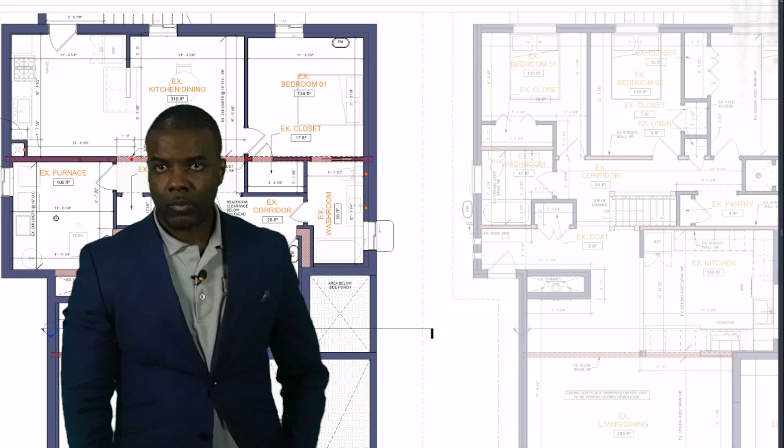Hi everyone, good to see everyone. Hey Ronald, how you doing man? I'm doing good. How are you doing, Nathan? I'm good, all right, good. And how are you, Tanya and King? We're doing good, doing great. Oh, I didn't even see you guys there, how you doing guys? We're good, full team here today. And Gabe just joined, Gabe can you hear us?

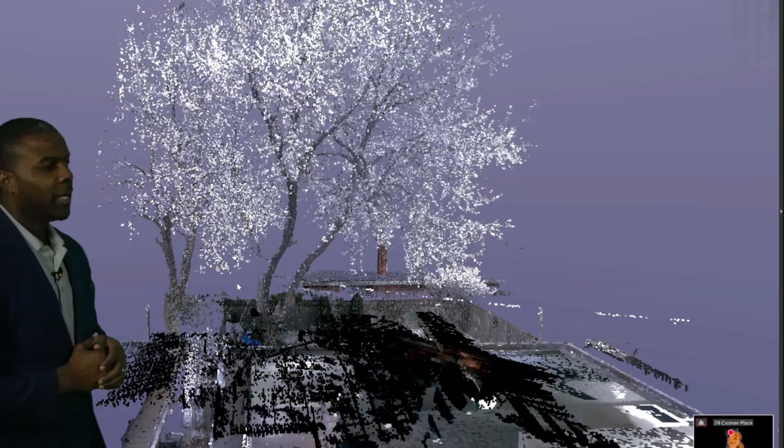So as you can see here, Jose is showing on the screen the data we captured on site. You'll notice we're able to walk through and take measurements on any of the items you can see on the screen here. So if we need to verify anything, we very well can, and we'll be able to discuss it at length if you guys like. I just wanted to show this, we're not going to get too much into it. This is the existing home, everyone on this call already saw this property and we know what's there. Now what we want to look at here is how we take that data and use it to develop what we call a digital twin. A digital twin is just a replica of your property. So could you show the single story existing overlaid with the point cloud for me, Jose?

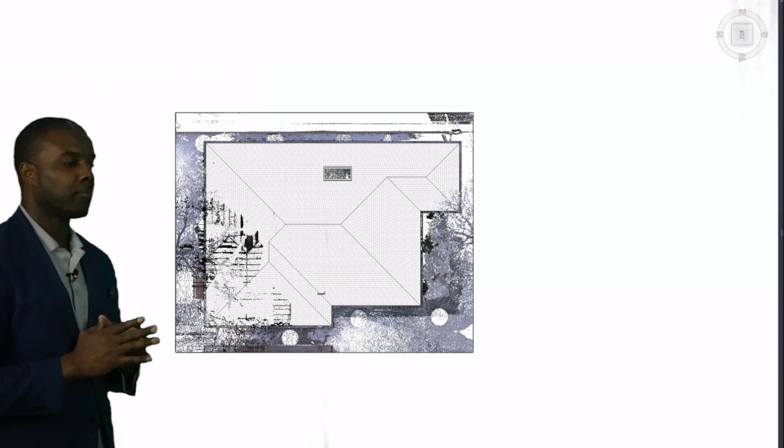We're not guessing the shape, form, measurements, or volume scale of your home. This is very precise, in some areas precise to a 16th of an inch, but overall you're looking at about half an inch accuracy. So it's good for determining whether or not things could be moved. We're able to identify a lot of the structural elements, and even though it doesn't see behind walls, we're able to determine where things are.

I want to preface the call with this. We actually take a lot of time ensuring we're presenting the most accurate drawings. In some cases, we may miss the placement of a window or so forth—that's not a big deal. We'll make sure we verify this before we submit for building permit against what existed, so that's going to appear on the drawings.

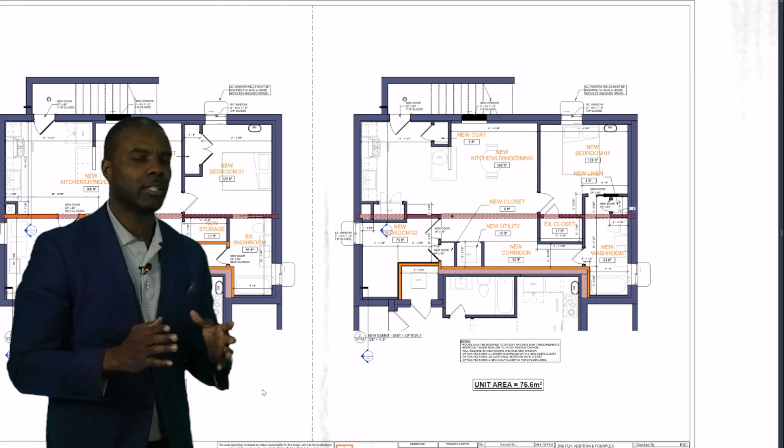Once we complete these, we then present some design options. You'll receive a copy of them. All the design options are basically 2D layouts of the space, but I'll also send the 3D layout, so you have the ability to manipulate it, dissect it, and figure out what was happening or what is happening. Those are the three elements we'll go in and out of, but we're primarily going to focus at this stage on the actual 2D drawings.

We're going to start in the basement because that's where a lot of the important structural aspects of the drawing are. The basement is also going to have a few modifications—one being that we're adding a second unit, and the other being we have to add an entry into that unit. So we do have some options for that.

But first, let's talk about the rear unit. So Jose, you were right, let's go back to the rear unit in the back. Before we get into the details, do you guys have any questions right now? No, I'm okay. All right, yeah, okay wonderful, okay so you guys are aware of this.

Right up here, that's the entry into this rear unit. As you walk to the back of the property, there's an existing walkout, that's the entry into the basement. Into this basement, you have this whole space, and that space is actually the open concept kitchen, living, dining room. Then right over in this area, this is where you have the existing bedroom.

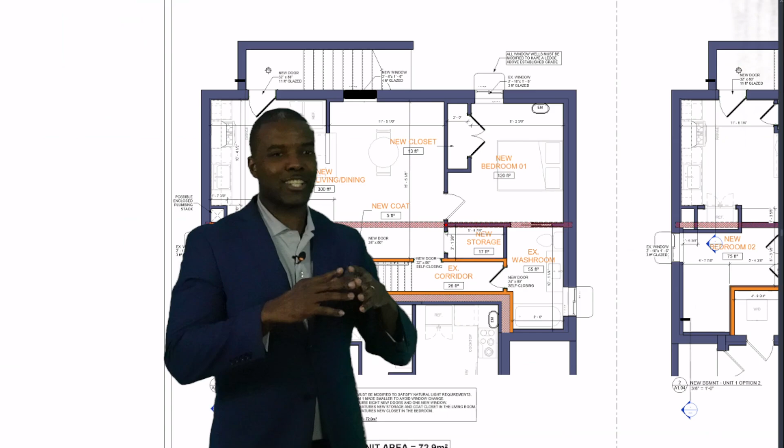You may remember from the site visit, we had to make this room meet the building code requirement for natural light. That would mean either we had to shrink the room or add a larger window. We always try to find the most cost-effective way to make things work. In this case, you'll notice we added this closet. You might say, Ron, we don't want a closet there—you may not want it, but we need it there just so the numbers can work out from a natural light standpoint. That's a building code requirement.

We had to put the closet in there, but the bedroom really hasn't changed, it's still going to remain as a bedroom. Then as you go down slightly lower, we actually did make some modifications here to the washroom in this area. Because what we're essentially doing—you'll notice, could you highlight the fire separated wall, Jose?

So we are going to, I'd prefer if you do it in a solid versus a block, or you can just select them so they're blue. But you'll notice that we have to fire separate the units, right?

You guys must have heard this in some conversation during your research. We have to fire separate the apartments so that they're independent, and in doing so we have to create fire separated walls. In this case, we are keeping the interior stairs that's there right now. But this wall right here is actually the wall that's separating this unit here.

Of course, you do have your furnace, which we're keeping intact, keeping the furnace room as intact. So we're leaving this entire unit as a one-bedroom open concept kitchen, living, dining room, and we're leaving the furnace and the hot water tank, or you just decide to keep that as a utility room. We'll talk a little bit about services as we go through the presentation, but essentially what we're trying to do here is create the most cost effective layout. This is the minimum you can do to make this a legal suite without going overboard. This is literally a bit of drywall and some studs, and basically this thing is ready for rent.

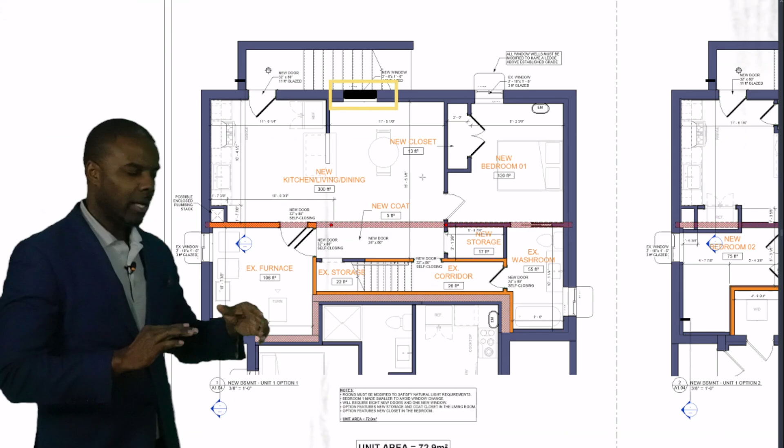Okay, well let's not get too excited, because we can't rent it out since the whole building is under renovation. But this is the minimum amount of work you would need to do to make this a legal suite. You can see we're leaving the interior stairs on this option. And remember, we have a few options - this conversation is to stimulate ideas. Maybe you guys might like option 1, option 2, or a combination of both, which we will develop. So keep in mind that we always present a cost-effective option, and we always present an idealistic option.

So let's take a little look at the idealistic option there, Jose. Same idea here, same layout, so we're not changing the foundation footprint or the footprint of the building. That would lead to a lot of requirements from a zoning standpoint, so we're not affecting that.

But what I want you guys to take note of is now we have actually modified - you can see this wall. Could you give us the all layer, Jose, so we can see the walls that were removed? You'll see all the elements that were removed once Jose pops that up. So you guys can notice - there is the stairs that's being removed, shown in orange right now, and the wall that was previously there is also being removed.

So you guys can see that wall has been removed, and now this unit becomes a slightly larger unit. It's always good when you have a slightly larger unit. You'll also note a big change here is that we're now converting this utility space. This space that was utility or furnace room before is now going to actually be a bedroom. Go ahead and turn off the demolition layer, Jose.

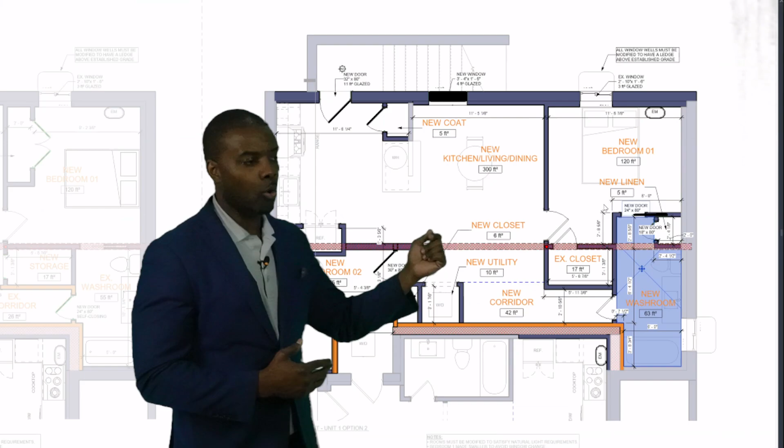So in this case, we're taking after repair value into account, because obviously a 2-bedroom unit is going to reappraise higher than a 1-bedroom unit. So this is something we're taking into account. Obviously you're talking a fair bit more work here - we're removing the interior stairs, demolishing the wall, making modifications to enlarge the room. So we have to add more natural light into the space as well, and then we're adding a bedroom. This means we're actually removing all of the furnace equipment and stuff like that.

Once you remove the furnace, it simply means we're now providing each unit with its own heating and cooling source, through the installation of heat pumps and blowers, whether ducted or ductless. Nathan will give you ample information on the different options available. For now, that's one option we're exploring once we turn this furnace room into a bedroom. I'll leave a window here for any questions, since we have 4 more spaces to talk about.

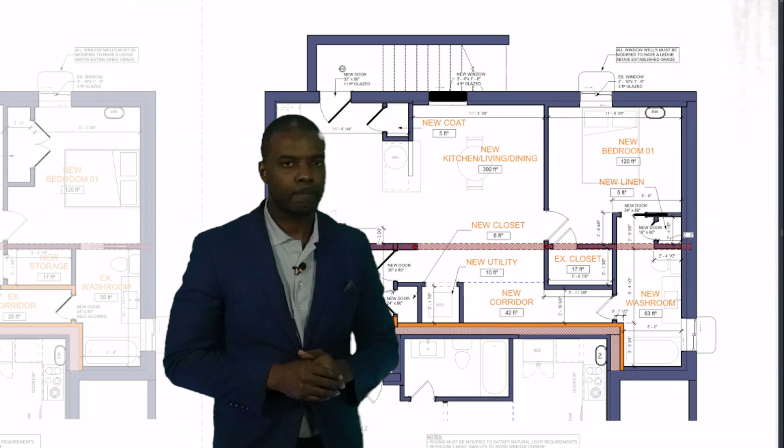Quick question: you said 2-bedroom. Is it 2-bedroom on one side of the unit? Because I'm looking at a furnace room that's turning into a bedroom. Yes, so the furnace room is going to turn into a bedroom, so that's 2-bedroom on one side of the basement.

What about the other side? No, there's 1 bedroom on one side and another on the other side. So the 2 blue boxes you're looking at - the existing bedroom remains where it is, and we're just taking out the furnace and converting that space into an actual bedroom.

Of course, so there's a divider, because when you said a washroom can be used by the same bedroom - the 2 bedroom, yes, that's a really good question. So what we're doing here - Jose, could you highlight this door here? This is the door that is currently... did we change the door? Anyway, this is the door that's going to give access from the existing bedroom into the washroom.

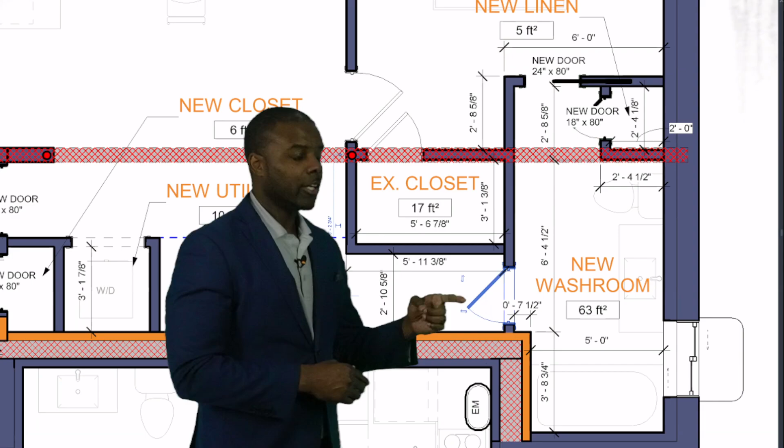And this door is going to give access from outside of that bedroom, because it's kind of odd that you'd walk through someone's bedroom to get into the washroom, like if it's two siblings or two friends. So we created a separate entrance. The only way we're able to accomplish that is we had to demolish the wall and remove the stairs and move the fire separation, which is now down here. So this is now the fire separation.

Does that make sense? I mean, none of this is supposed to make sense by the way, so that's why we're here to answer questions. So what we're looking at right now is just one of the 2 basement units - we're only looking at the first basement unit at the rear of the property. We're showing you guys two options you can explore: one being a 1 bedroom and the other being a 2 bedroom option. You have the ability to explore any of those options, and we can make it work for you from a building code standpoint.

Now obviously there's a budgetary standpoint, but Nathan will speak to that once he has the files and is able to assess that and do a quantity survey.

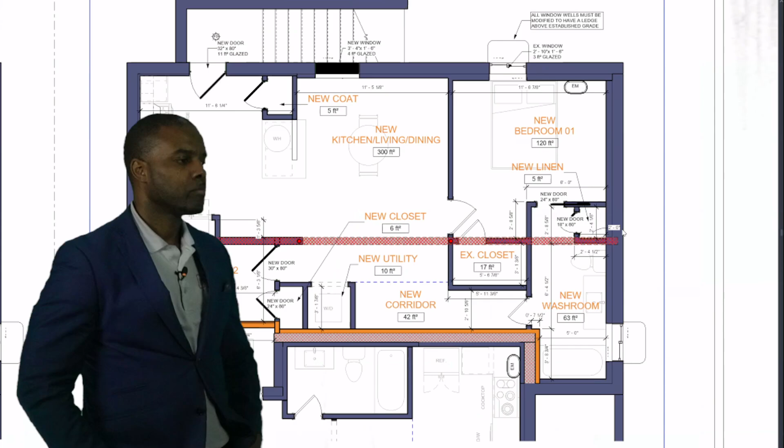Can I ask another quick question? No quick questions, only slow questions, okay? With this second option - is natural light not an issue for the master bedroom or bedroom 1, where you'd need to move or create the closet or expand the window size?

Yeah, so that's good - you guys actually have a window inside of this, if you want to say primary bedroom. There's a window that's here right now, that's this window. And you also have a window that's right here. In fact, let me come on this side here. So this is a window as well, right here.

So you have a window inside the furnace room. That window is going to serve that second bedroom that we're creating, so we don't have to cut any windows out. That's the only reason why we would propose something like this, because we think there are some economies of scale you could utilize, and some existing requirements already met with existing windows and so forth. So this option does give you 2 bedrooms, and I'll step out of the way if you're looking at the wrong screen.

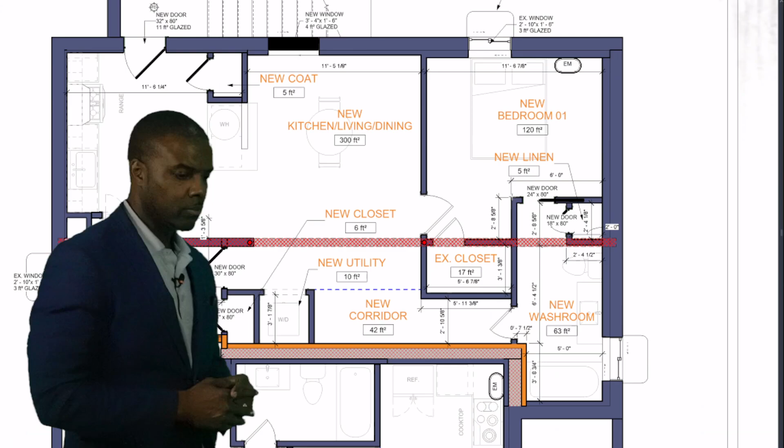This option gives you the ability to add 2 bedrooms into that space. So I'll just add here, the new bedroom is made a little bit smaller by extending the new washroom to add that linen closet to meet the natural light requirement. This part's new.

So that natural light requirement isn't per room, it's just the overall square footage of living space that has to have a certain amount of natural light. Is that how it works? That's a very smart question.

So to answer that question, every room, as per the Ontario Building Code, has to meet a very specific percentage of glazed area based on the square footage of the room. A bedroom needs to reflect 2.5% glazed area to the actual footprint or floor area of the room. So for example, if the bedroom was 100 square feet, the glazed area of the window needs to represent 2.5%, which would be 2.5 square feet. Is my math correct there, Jose?

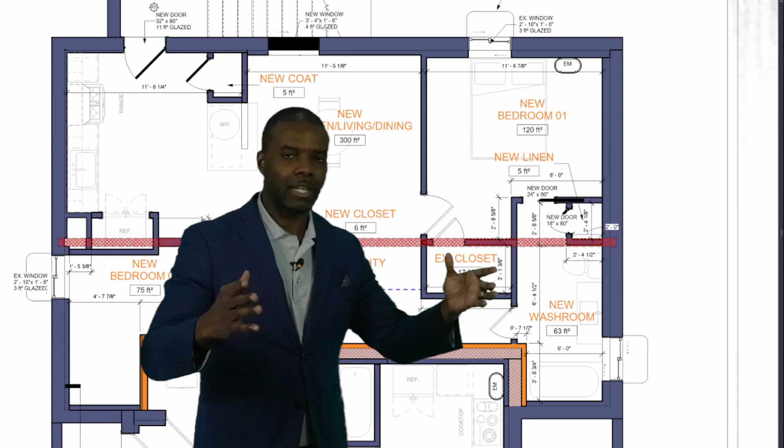Yep. And the same for the kitchen, living, dining room area, but more specifically the living dining room area needs to reflect 5%. So in the case of a 100 square foot open concept living dining room kitchen area, the glazed area accumulatively needs to be at least 5 square feet. While those numbers aren't shown here, to avoid cluttering this first iteration of the drawing, we've taken all those numbers into account and we'll submit them to the building department when we actually send it for review.

Is that helpful? I have a question. My question, Ronald, is in this second version, is the electrical and everything separate from the rest of the house? I'm assuming the first one isn't separate.

That's a good question. In fact, this property is going to have really two overall components: a multi-generational component and an income generating component.

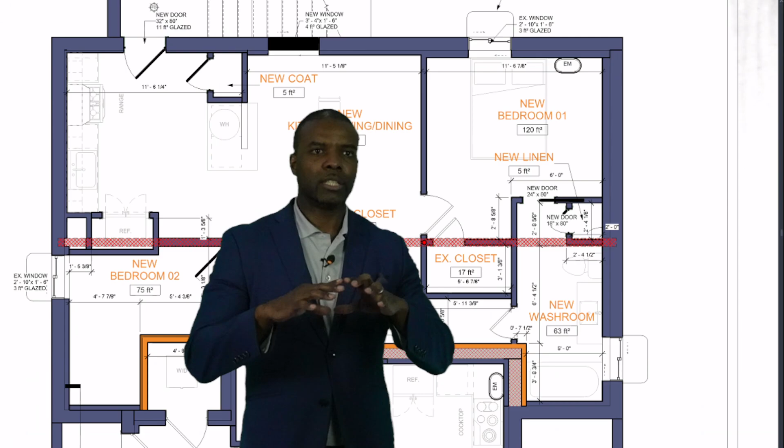And for the income generating component, I am going to be advising the Darkos that they should separate those elements completely, because it's very difficult when you lump, for example, the electrical bill into your lease, where you say you're going to pay 30% or 20% of the water bill and the gas bill. That becomes very complicated. So I'll advise them to separate the water and electricity so every rental suite has its own bills and is responsible for paying them, so they don't have weird interactions with future tenants saying 'you got to pay your 40% this month.' That's an odd conversation to have. They don't have to, but that's the best way to streamline operation of the asset once it's done.

Now as far as the other generational component of the property, they could decide to just do one bill, and this is where you come in - you might say, if we split it into 2 meters versus 4 meters, or 3 versus 4 meters, you can save a certain amount of dollars. I'm not going to get into the weeds of it, but the generational component, which will be the main floor unit and the second floor unit, could be on one meter, or they can split that so everyone is responsible for their own usage.

But I think what's more important is that in the future, if the Darkos decide at some point, 'we're moving on up and we want to move into some other home,' then all the utilities are already separated.

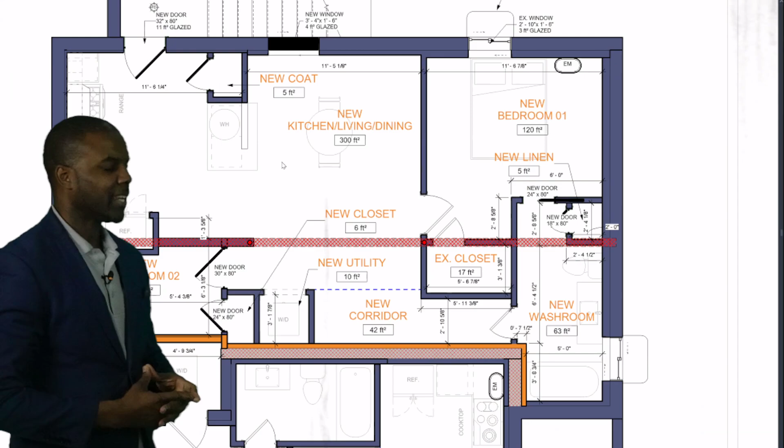Yeah, that's right. So within the basement units in particular, because this is a small unit, and any unit, I would not suggest this for your larger unit upstairs. But for every unit, these 2 smaller units downstairs, you can easily use a 21-gallon hot water tank. It's about 24 inches tall or so. And that can go into a base cabinet or somewhere really inconspicuous.

And that can really give the unit, and I would stress that I would suggest the hot water tanks be electric, right? Just simply because once it's electric, you can put it onto that unit's specific electrical bill. They will pay for their hot water usage, which indirectly makes them think about how much hot water they're using when showering. So it inadvertently reduces the amount of water they use because they're not going to be running hot showers for 3 hours, right?

So this is kind of a smart way to do it. Again, it's really up to you guys based on installation costs and of course the actual product itself. But we have had many clients that have done this. Okay, any other questions on this here?

We have a lot of material still to cover here. You guys can certainly always come back to it. I'm sure more questions are going to come that are very similar in nature as we look at the next unit. Okay, so great, this is awesome.

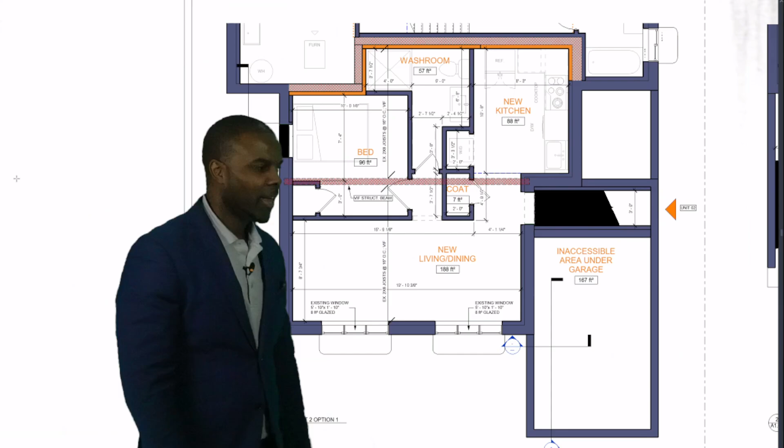Okay, awesome. So we actually did something nice here, I think is really nice. And what we tried to do, could you just show both options side by side so we can take a look at them both? Yeah, so both options in the front unit, we attempted to make both of these bedrooms, right?

So there are two bedroom options because we believe, is it two bedrooms or no? There's one 2-bedroom and then there's one 1-bedroom. So let's look at the 1-bedroom option first because again, this is the cost-effective option. We're always going to look at the cost effectiveness of a project before we look at doing something idealistic.

And we only do an idealistic option if we think it's going to have a higher after repair value. Because after you guys have finished this property, we would like you guys to have the ability to pull out or refinance and get much of the money that you put into the property, right? So while this is going to be a family home, we want to make sure it's treated like an investment, so you guys can actually get the benefits of the investment component of it. So we'll just take a quick look at the 1-bedroom.

So right here, real quickly, you guys might notice that there is a stair here. Now I do want to, Jose, could you pull up the 3D of that, or pull up the separate sheet that we created?

I want to talk a little bit about this, because I know visually this is going to be quite...

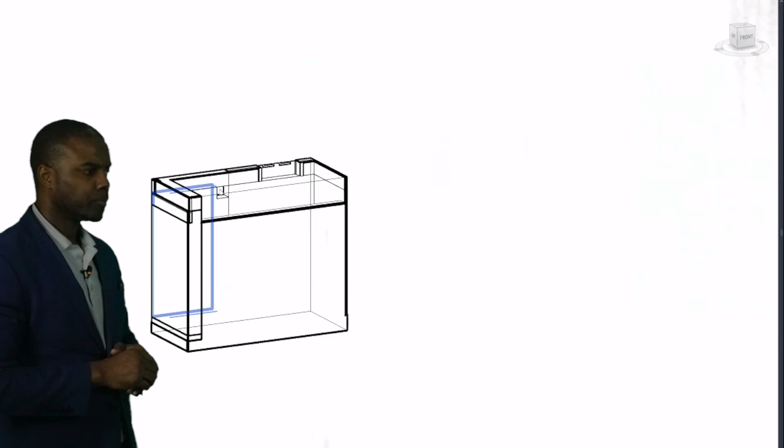Just give Jose a second here. He's just going to pull up the stair configuration within the space. Didn't we already create this, Jose? Why are we recreating this again? It's another file, hold on. Yeah, okay, all right, never mind. Let's continue on.

Let's give Jose a second, he's excellent at what he does. Sometimes the files are just hidden away. Could you pull open the PDF that we have on this? Let me open the other one. I think you already have it saved inside of the sheets, because I was looking at it.

Sorry, I just want to really point out how the stairs is going to be configured, because it's a little bit challenging to understand what we're trying to accomplish. Thank you very much, Jose. Okay, so you guys can visualize this.

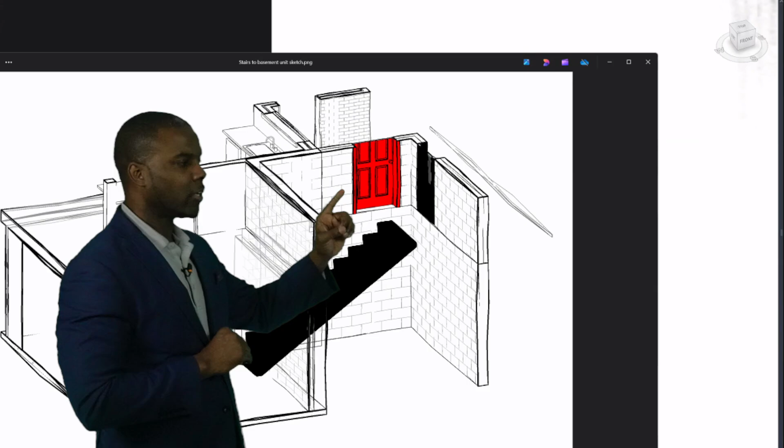So we're given a 3D option here. We want you guys to see that we're inside of the garage here, right? So the stairs is actually inside the garage. What we're actually proposing, you see the red door? The red door is where the door currently is into the garage. We're going to remove that door. I mean, you can keep it, but actually you can't, because someone will fall to their death probably. So you have to remove that door.

And what we're doing, we're popping a new door in where that black door is, off to the side of the property. And the stairs is going to go right up to that door. So someone comes, opens that door, and then they walk down the stairs, down into the basement, right? And we already sort of assessed that the headroom clearance is going to be adequate for what we're proposing here.

So this is one of the options. We thought we would explore this simply because while our exterior outdoor installation is always great, what we think is, one, you don't need that garage -- you can convert it into completely livable space. Secondly, this is excavation work that can happen at any point throughout the year, because that soil -- I don't want to say it's not frozen, but it's definitely not frozen like exterior stairs or soil would be. So this work, and we think this interior stairs, is also going to be better controlled in terms of temperature and so forth.

So we wanted to provide this as an option to what we think is cost efficient to get it done. Now, with that said, I'm just going to move on here.

Right up here, this is going to be your kitchen. So you come down the stairs, you walk in, you got your kitchen up top, right? You got your open concept kitchen, living, dining room area. And then, of course, you got your washroom right up top here -- that's going to be your washroom area. And then you got your bedroom. So this is going to be a one-bedroom unit.

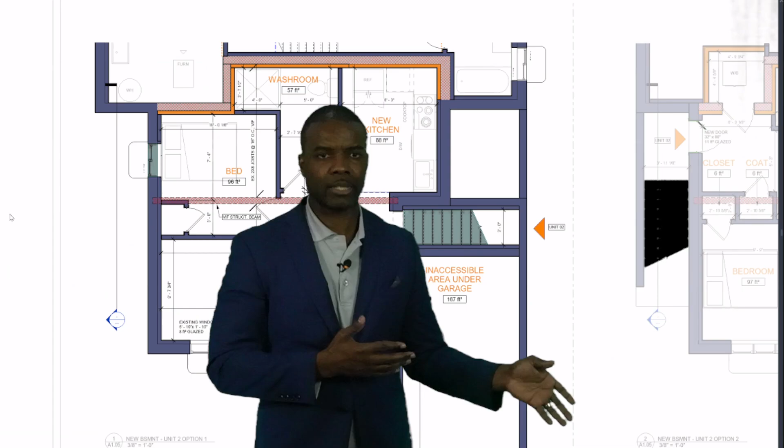Personally, I will not be washing my clothes in a washing machine that someone just washed their shoes or their mats in. It's a hygiene matter, and I think it's very valuable that you guys consider putting independent laundry amenities. This can just be condo sized since these units are small.

So why don't we swap on over? Do you have any questions right now that we can potentially answer on that, or do you want us to move on and look at that after? Okay, we'll move on.

I'll walk here so you guys can see the orange wall up to the top. That orange wall is the fire separation between the unit on the adjacent side, the unit at the back of the property. We have to fire separate that entire unit. Every fire compartment, every dwelling unit needs to be fire separated from each other, in this case by 45-minute fire separation. We'll make sure that wall is assembled to meet that burn time and ensure it meets building code requirements.

Jose, just to help with the visual here, could you swap this? I want them to visually see the walkouts and how it integrates with the property. This might be a little challenging, but I want them to see that the stairs we're looking at are walking from surface level down, down to the door.

Could you pull the 3D? Just pull the regular 3D model and change the option. Let's give them a quick minute here. I think it's really important that you see what this looks like.

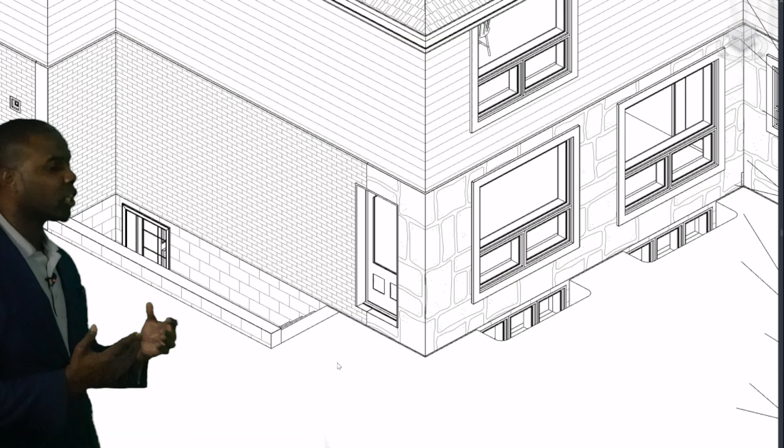This is why I'm saying we have this ideal option, which does require the door to be removed. We have another option that could work and gives more ability to do more with the interior space, but it limits the after-repair value. In this case, we're moving the door, the entry door into the main level, and then we have a walkout going into the basement.

Of course, there will be guardrails. Could you give us a view of how that stairs is going down there, whether you make it transparent or not? I want you guys to see, or move the site, the topography. Okay, so you can see how the stairs are.

So the stairs actually goes down into the basement. Now you can have a better look at this. You can see the stairs going down, the risers going down, down, down, down, down, and then it goes directly into the door. That's where the second access to the basement that we're proposing can go.

Why would we do something like that? One, it would comply with zoning bylaws. Two, it now allows us to utilize more of the space in a manner that we can actually put 2 bedrooms. So let's take a look at the floor plan.

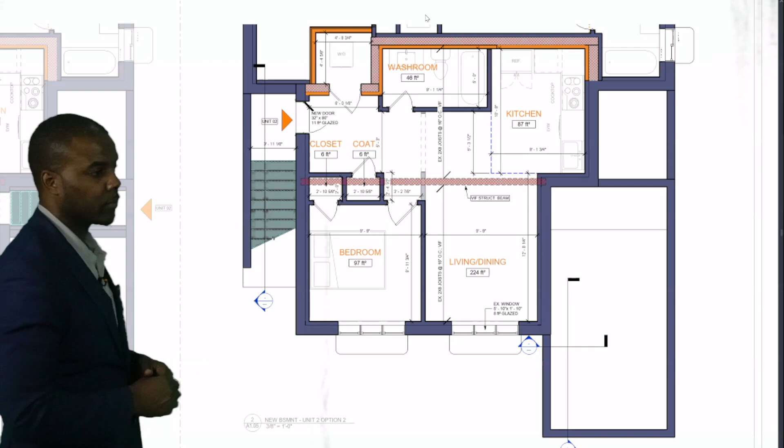Going back here, you can see the green steps going down. It goes down and pops into the unit. This is going to be the entry into the unit where the orange arrow is, that's the entry into the unit. Right above, I think, what's that there, Jose?

That's the laundry room. So the laundry, and then as you come to the laundry, you also have your washroom here, and then you have your open concept kitchen, living, dining room area. Then we have the kitchen, dining room here, and we have the bedroom here. I thought we discussed 2 bedrooms, but this is 1 bedroom.

I only have 1 bedroom here. Pardon me, we actually put 2 1-bedroom options. I thought we were exploring a smaller den-like bedroom, which we could very well put here, but with that said, there's 1 bedroom here, so I take those words back. I know I've been recorded, but I take those words back.

We have 2 1-bedroom options: one with the stairs on the exterior, the other option with the stairs on the interior, which is through the garage. In this case, you just have slightly more utility of space for the open concept kitchen, living, dining room.

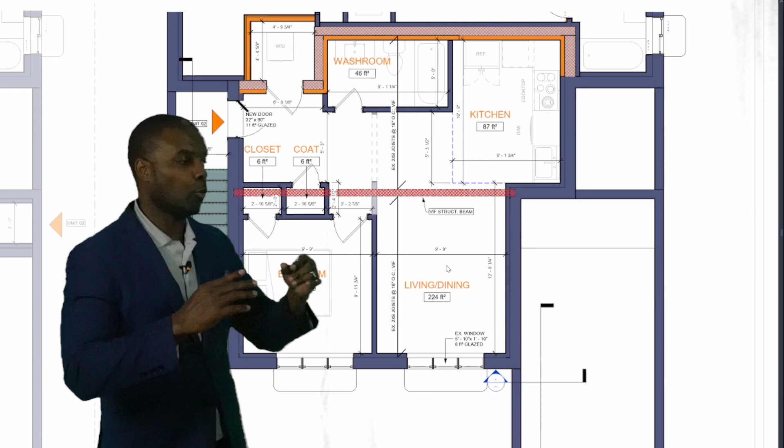So any questions that you guys had on this option, or you guys can also go back to the other option and we can also talk about that as well. Yeah, I have a question about the first option. So with the location of the door into the garage being moved...

One of the things we highlighted on the questionnaire is that it would be ideal to have direct access from the house into the garage. So it doesn't seem like either of these options would provide that opportunity. Is that right? No, we haven't gotten to the main floor yet, but we did provide access from the main floor level into the garage space.

So we'll definitely get to that, that's a good question, but we haven't gotten to the main floors yet. Okay, sorry to rush. And then for the second option that you presented with the new stairs on the side of the house, maybe this will come up when you discuss the main floor. But basically when you're moving the location of the front door, that's going to change the configuration of the main floor as well, right?

Absolutely. Well, not really, we did do some reconfigurations. Again, what I want to give you guys here is a lot to think about. I don't want to just bottle you into this is the option that me, the designer, thinks is the best. No, really, you're going to be living here, you're going to be occupying the space, and I really want your input.

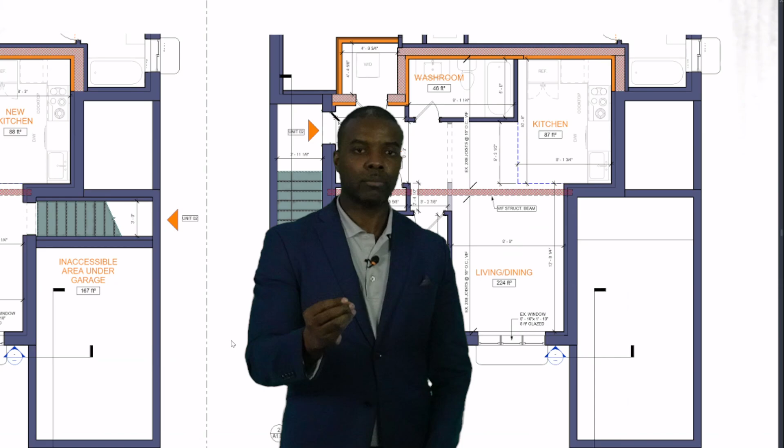I want to give you all the options that are available, and then we can discuss which option I think is best. I'll tell you which option I think is optimal given the ultimate end goal, but I want you guys to know what was my thought pattern and why I'm suggesting what I'm suggesting. Truly, I know you guys are able to make this decision. This is not some high design here, this is functionality, flow, and of course finances. This is a financial decision you guys are making, in spite of all this design stuff we're talking about.

So with that said, the whole idea here is that we give you guys as much to think about. I will be showing you what we did on the upper level, and then we can come back and show you how it actually integrates with each of these basement options. Okay, that makes sense. Thanks, Ronald. Okay, no problem.

Ronald, I have a quick question for you. Yeah, please. In option number one, if you were to go through with the stairs in the garage, would the garage still be usable, or would we have to convert the garage at that point to something else? Yeah, that's a great question. It's going to be converted into something else. It's no longer going to be a regulated parking spot from a size standpoint, but that's not required when you're converting a single family home into a multiplex.

So no parking is required, right? So we'll be fine from that standpoint.

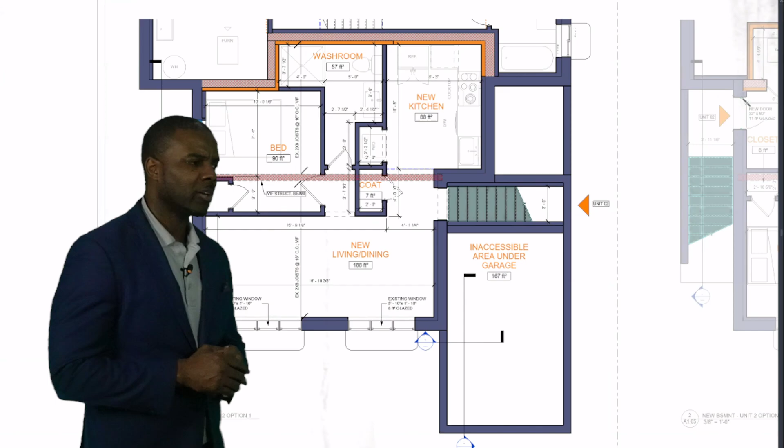Okay, and my last question is, basically the biggest difference between both options is really just the staircase location. Because mostly everything else is the same, it's just the staircase. Well, I mean, yeah, you can see there's some configuration differences interior-wise, but they're both one bedrooms. But it's definitely the walkout.

And I guess, from a construction standpoint, I'm sure excavation from the exterior is significantly easier than with a mini excavator or something like that, from the exterior versus the interior in the garage, right? But maybe if this was happening in the height of winter, you might say the interior option might be the best option, right? Because this is not going to be frozen rock solid, right? So, yeah.

Okay, thank you. No problem.

Awesome, okay good. So we'll continue going on here. Again, still a lot of material, but I do want to say all of these floor plans, none of it stands alone. They're all integrated somehow into another option, and we can always go back and forth between options. So now we're going to just look at what we proposed here on the main floor.

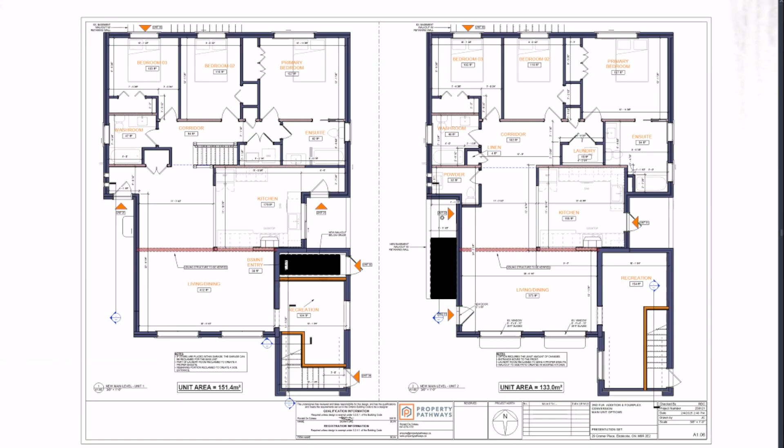So I know this is where the parents, auntie, are going to be occupying, and we also want to keep in mind that this main level is actually in really good condition. It's a shame that it's going to have to be dismantled to some degree. And Nathan, you're going to have a special time figuring out how that's going to happen, right? But we have to do some type of dismantling here.

But what I want to say is it doesn't have to be all of it. In fact, what we're suggesting is that we try to maintain the rear or back area as much as possible, as well as the kitchen area. So the kitchen area, we try our best to limit any modifications to it. But again, to accomplish the goal and meet some of the items on the questionnaire you sent back, we have to make some modifications. We try to limit those.

But I do want to say, if I haven't said it before, the renovation will completely impact all aspects of this property. We are removing the roof. We are installing new, maybe TJIs, new joist system probably. It's going to be nearly impossible for someone to walk on stilts to install these beams or joists overhead, right? So there's going to be a lot of things that are going to be damaged.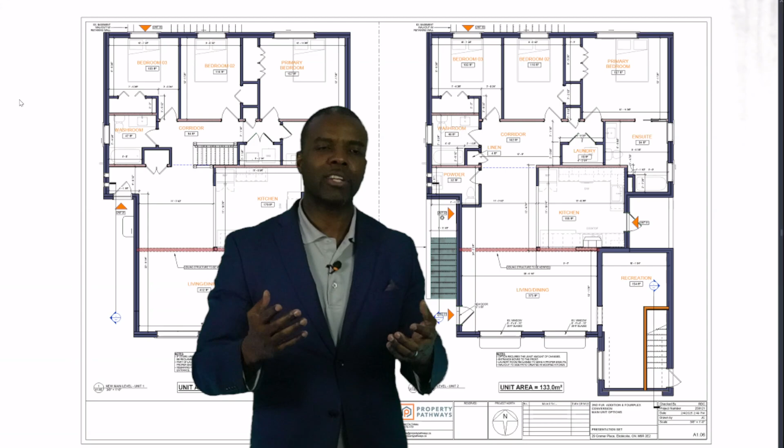Please make sure that it is considered. I would have mentioned this to you guys before, but just please note, this home is very old, and it's going to be very difficult to try to salvage a whole lot of stuff. Now you can dismantle it, remove it, set it aside in storage, and put it back. But most likely there's a lot of things that will have to be removed so the tradesmen can actually do their job properly. Just want to make sure you guys have some understanding of that.

But with that said, we are drawing on paper here, so we like to think everything is perfect, but things aren't as perfect as they appear on drawings, right? It's very messy on site. But I do want to point out that we're trying our best here to maintain all of the rooms above. Could you guys see the rooms above? You want to highlight those for us, Jose?

1, 2, 3. So we're trying our best to maintain the 3 bedrooms that are currently existing in their current format. I mean, look, we could tear this house up and start shuffling around bedrooms and stuff, but that's a waste of time, a waste of money, and it really shows our lack of understanding for what you guys are trying to accomplish.

Unless you guys say to us, look, you know what, we don't want this. But I know, after speaking with you on site, Tanya and King, we know that was not the goal. In fact, you guys were saying, please, can we keep everything the way it is, right? We're going to try our best to do that. On this cost-effective option, I want you guys to notice that we're keeping the entryway right where it is.

Two, we're keeping the bathroom where it is and in its current size. Three, we're keeping all the bedrooms, as we just mentioned, in its place.

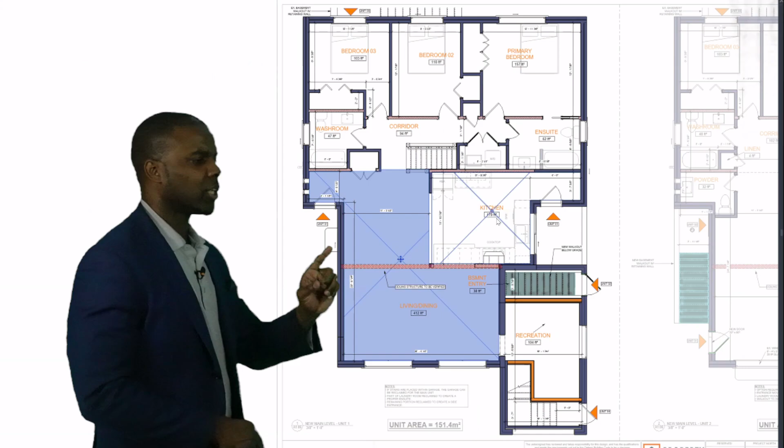Could you turn on the demolition layer? I did want to say, and I mentioned this on site, we are planning, and I would suggest we do, remove that gas-fired fireplace from there, that chimney. I would just remove the chimney, right? For one, you don't want to have a gas-fired place in there or wood-fired place. And if you left that space there, as is shown right now, if you just left it there, it's just an extra bulky, chunky thing inside of the space. It will cost to remove it. So I want to be mindful of that. But it is something that I'm suggesting you remove it. It will really create this really nice open space.

And then, of course, right down here, to answer the question, I think was Tanya, I think you asked the question, like, are we actually having access into the garage? As you can see here, on this option, we actually did create access into the garage. And there is some additional storage or whatever space you want it to be. That can be a little office, somewhere that, you can do a lot of things with that space. That can even be a guest room, right? For whatever the reason might be, so this is something that could be done.

The way that Toronto is going right now, you'll likely be able to do six units in a matter of months. So maybe this can become somebody's studio right in there. You just shut this off and this becomes a studio, maybe for a student, and you're providing them with meals and whatever the case is.

I just want to say you guys have an extra space down there that could be utilized. And if you notice, there are some stairs running in front here. You might be wondering what's going on there, Ronald. Well, that stairs actually supports one option. Could you just flip the optionality there? Actually, no, don't worry Jose, we'll discuss it on the next option.

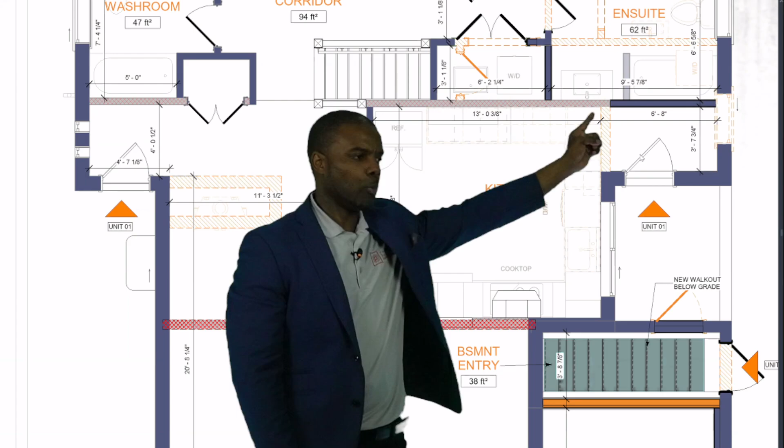I did want to say we are reconfiguring the kitchen. The kitchen is going to, we're going to demolish the wall currently there. And this is going to just open directly into that area that used to be open along the side. So we're removing that so you still have access to entry points into the main level. They'll be right there. So let me see which hand, this hand, this hand, okay there, to access into the main level.

For example, on this side you might say, okay, we're having a barbecue, you can put a barbecue grill right here and do some stuff. And then you also have access to come out here, walk up to the back, and you have a little bit of green space on the outside. So these are things we're thinking about and considering. We could make this a little small ramp there so it's easier to move up and down. Again, we can future-proof this in the event our auntie and mom starts aging there.

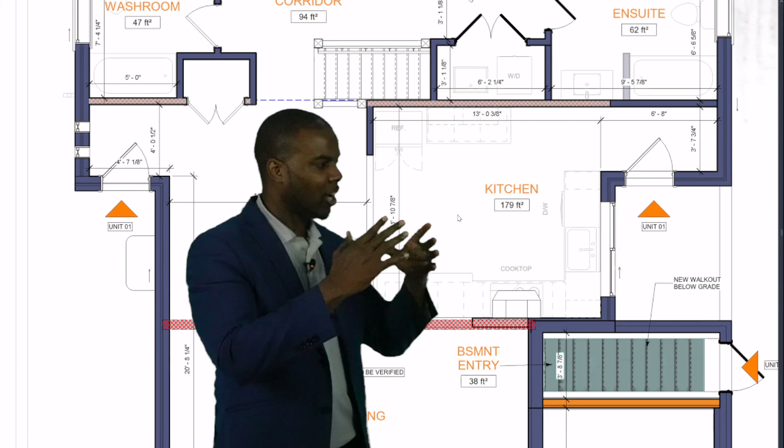So we want to take all these things into account. As I said, the kitchen, you could take it down and put it in storage, then put it back with some modifications and extra things. We know this is not Legos, we're not just plugging and playing. There's a lot of things that happen when it comes to removing kitchens and installing them and so forth. But really, we wanted to provide the optionality there.

If you look here, if you zoom out one more time Jose, you'll notice the stairs into the basement is there, right? That green stairs leads directly into the basement from inside the garage. So that's the option where the front unit has one access into the basement. Any questions on this one? We're going to cover similar type items on the second option, but any questions here in particular?

There's a stairs. You move the stairs from the basement and the stuff in the garage. No, you're okay, unmuted. Did you want to? Yeah.

Sorry, just looking at the staircase, I think all options considered, we should just remove the staircase on the main floor and turn it into maybe a storage area or something. That'll be easier, I think. The mom and auntie have a fridge and deep freezer that we could store in that area, so we can turn that into storage, make it easier.

Maybe when we get to the second option, you show us a version that doesn't have the interior staircase, right, Ronald? Yeah, so we'll talk about that. That's right.

Okay, great. Let's take a look here. Yeah, and I mean, we're getting to all of it, by the way. Again, this one a little less.

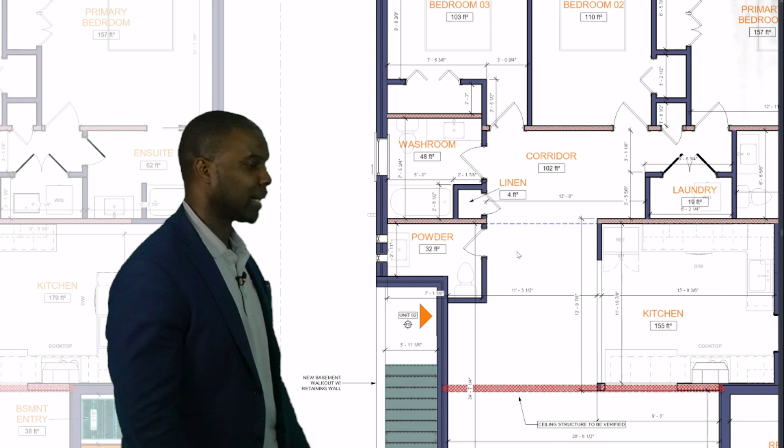And again, what we're talking about here is the mobility, the accessibility component of it. We can make a much larger door, we can put in even a shower that has more convenience. So again, I am future-proofing this. I know, hopefully I'm not coming across as - I think it's professional to plan for these things. So we are just giving you guys the option.

You guys can simply say, nope, that's not going to be the case, and we certainly just leave things as they are. But we do think it's a good idea if you can do that. Because right down here, is this a powder? Yeah, so that's a powder. So when I look at this space, a 3-bedroom home with essentially 3 water closets, and there'll be 2 occupants in this space.

This does not make a ton of design or layout sense. But again, sure, we can add the powder room here, but we have 2 existing washrooms, right?

Sorry, Ron, I just wanted to interject one minute. Please, go ahead.

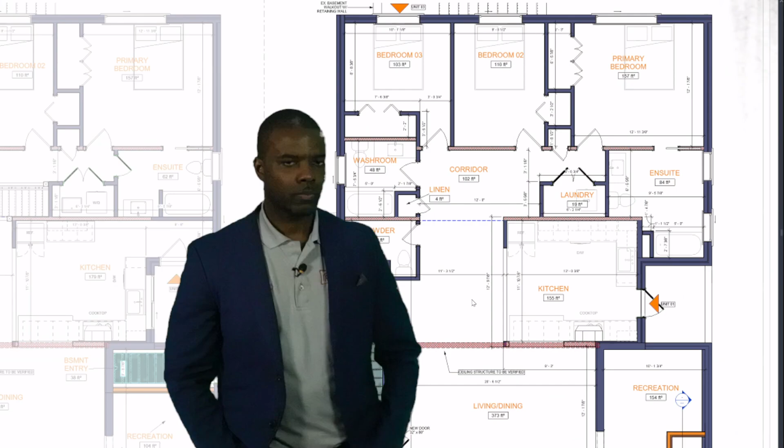Tanya, that powder room, if possible, on the main floor. So we considered putting an option with the powder room just to show you what it would look like. But ideally, if you have guests coming over, you don't want them using the washroom that maybe your mom and your aunt uses. But if it's gonna give your mom some more space for the next 5 years or so, that's something to consider. Do we make it an accessible washroom now, or do we enjoy the benefits of a powder room? It's just pros and cons to weigh there.

Yeah, fair. And so the washroom as it's laid out right now is the existing configuration, or did we have to reduce the space at all? This is the existing, the existing. Okay, cool, good to know.

Sorry Ronald, I don't know if you were done explaining, but I was wondering if there is a coat closet on option 2 that we don't see. No, not in option 2. There's just space for a bench and hangers across this whole wall here.

Okay, so one could be added. One could be added, yes, in both options. That's a good point though. We always try to steal spaces for those things, but those storage and closet arrangement spaces are very important, so we'll make sure to add that into the final iteration, okay?

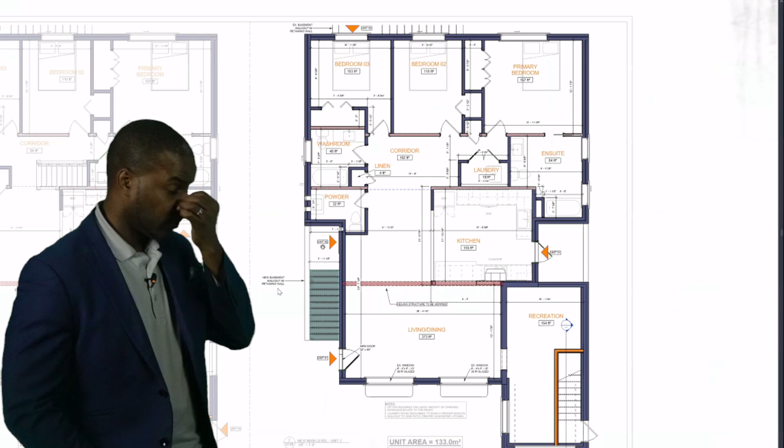Okay, so that's a good question concerning the powder room clarification, Ginny. And again, just on this option here, same idea. If you notice, inside the actual open concept living room, you do have access into the garage again. The garage is no longer a regulated or functional parking spot.

That's not going to be the case, and you'll notice what it is. This is one of the things I actually don't have the answer to, but I will find that out. What I'm saying is that we are not trying to modify the garage door. I know this might sound odd, but what we're going to do is frame in behind the garage door, so that it's an enclosed space, but the garage appearance is still going to be on the exterior side, because I think removing the garage door could be a character matter that's discomforting for a lot of people, and they'll have complaints.

Maybe while I'm on that note, I'll say this as well, Darkos. This is going to be an odd comment, but one I'm going to strongly recommend is that you guys, through us, actually do an open house on what you're planning to do with your new neighbors. I know this comes across as, what are you talking about, Ronald, but all I'm trying to do is increase the peace amongst the neighbors. You guys are going to be living in this neighborhood.

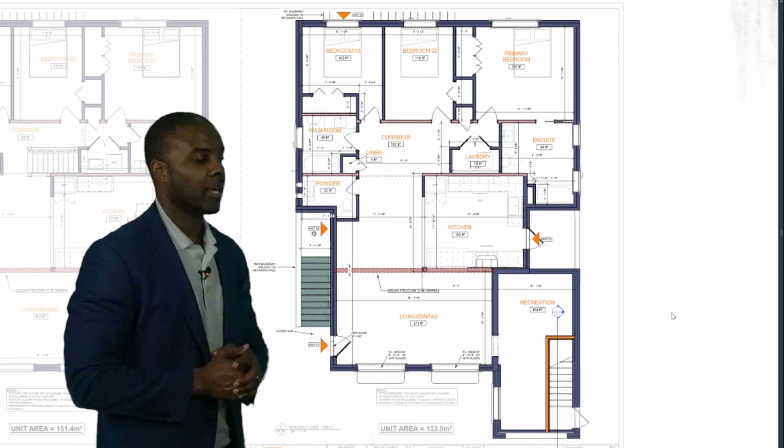This is not a rental property. Your mom is going to be living there, your auntie, your family. You're going to be raising a family here. It's not going to hurt for you to simply put up a little sign and say, hey, we're proposing a design, this is what it looks like. I'd like it if you want to join us, meet us, we're the new neighbors, but we'd like to share what we're planning to do with our property.

I know this comes across as, this is my slice of the pie, I don't want to tell anybody about my slice of the pie, I just want to eat it. But you know what, I'm just going to say that if it makes sense, if you guys agree with that, we would be more than happy to promote that. And Nathan, obviously, because you want your neighbors to know you're doing this professionally.

I know this might be uncomfortable, but we will handle the correspondence and conversations. It's not required by the city - you don't need to tell your neighbors unless the city says you have to. But it's a really good way to manage relationships with your neighbors, since you'll be neighbors. Something to consider - please put some thought into it. Yeah, we'll definitely consider it. Okay, awesome.

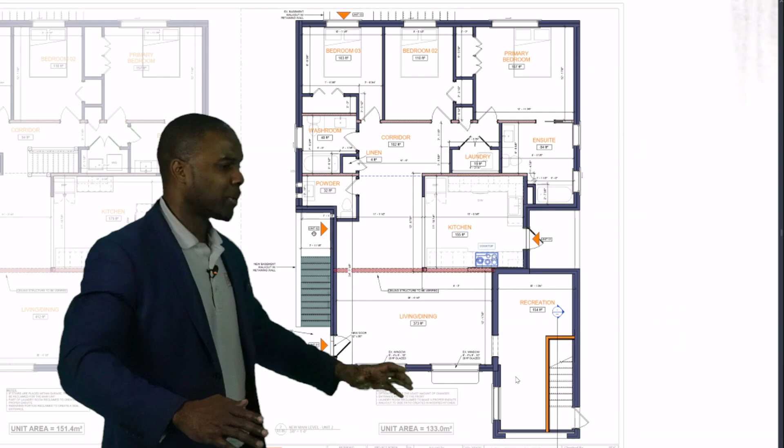So this is the option for the main floor. There's not a whole lot happening here - we really try to maintain a lot of the spaces, but there are some changes, like the door and a little bit of change on the access into the garage. That garage space could very well be used for storage. Maybe you're moving and have a lot of things you don't want to put into a U-Haul storage - this can serve as your own personal storage. Or if not, it could be utilized as a small office, or maybe a playroom for kids. It can be used in many different ways.

So, two quick questions. I'm looking at the entrance for the main floor - is it possible we can move it right in between those two windows, toward the front? No, it's not wide enough.

Yeah, that's a good one. Why not? Actually, we thought about this - to remove a window and put a larger door with a side light. Or we could just extend the window to get one full window and have a door instead. Yeah, you can, absolutely, it's very possible - more restructuring though. You'd have to restructure that, put in LVLs to span that opening and so forth, but that stuff can definitely be done.

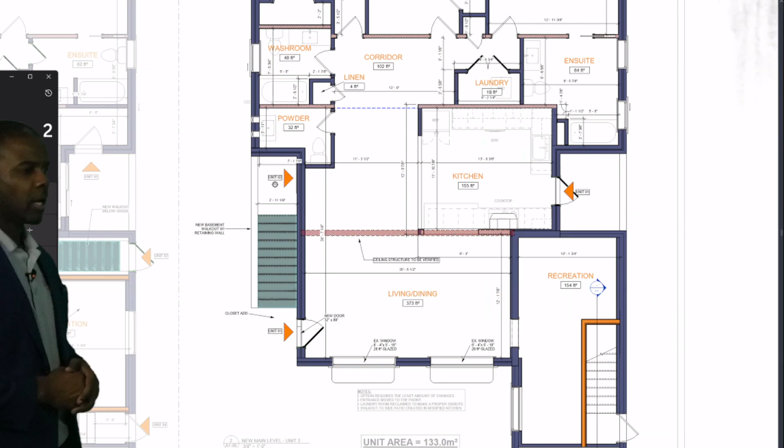Just want to point out that you already have two lintels here. If you remove the window and remove the base where the brick is, you can easily put in a door - probably a specialty or special order door that has a side light and fits that opening. So that's definitely a possibility.

We can talk more about that with Nathan as well, because once you start getting into it, everything has some cost to it. There's no free ride - I'm not saying you guys are looking for one, but anything we do is going to cost. For example, if we put the door here, we're special ordering a door that fits this opening. If we put the door here instead, we have to destroy all the bricks, add a new lintel, kings, jacks, support it, new door. So there's pros and cons - which way do we want to go? I'd suggest thinking about lifestyle first - how do you want to live, how do you want to feel in this space - and then value engineer from there based on what the cost comes back as.

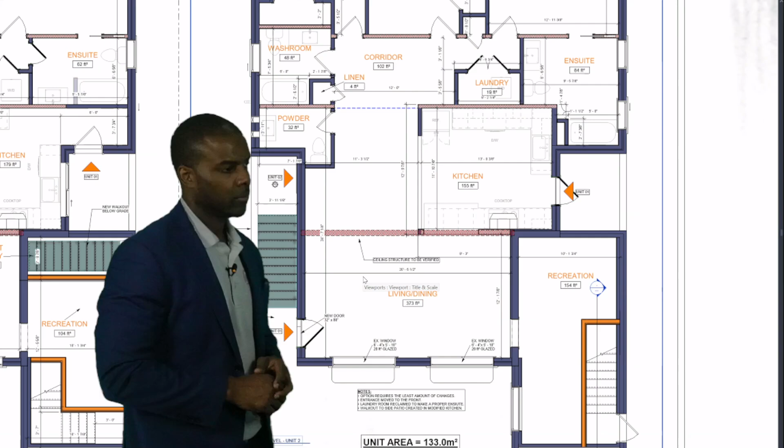I have to run to a work meeting, so King and my aunt will continue on, but I have a quick question. In this option one, I know you gave additional room to the primary ensuite bathroom. My aunt here has a lot of things, a lot of clothes, and her concern is that even with a really cool organization system in the existing closet space, it won't be enough. Is it possible to take some of the space added for the expanded bathroom and use it for extra closet space instead?

Would you want to explore a walk-in closet, Tanya, or is that too much? I'll let Glenda respond, she's right here. Hi, Miss Glenda. Where would the walk-in closet go, given the layout? Would it compromise the enlarged bathroom?

It's a bit difficult, we don't want to make too many mods right now, but we'll take that into account. There's a dimension where we could explore removing the closet from the adjacent bedroom and extend this by another closet size. If you delete that, essentially this is what could be done. Very cost effective, and you end up getting maybe another 36 inches of closet space, and you can rearrange the doors and so forth. You could put a regular IKEA wardrobe inside the middle bedroom, or we can frame in another small closet. So that's an option there as well.

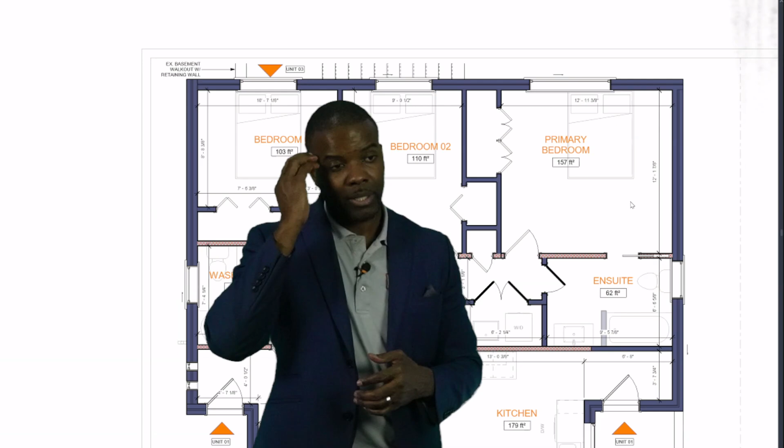Am I pronouncing your name correctly? We want to know from you what's more important: to have a washroom that you can really enjoy yourself in, have fun, be comfortable, or would you rather have more storage for clothing? Because as I said, there's no free ride. Either we put a smaller washroom, maybe a stand-up shower stall, in exchange for more storage, so you want to think about what you'll need, not only today but in the future. Would you need more storage for clothing, or are you willing to consider donating some of that clothing? Maybe that's too much of an ask, or do you want to have a larger—

So my clothes will not be donated. What you see in my bedroom, there is no space to hang anything, it's mostly shelves. That's okay, that one we can just take it. We can just concentrate on my bathroom.

So I think the bathroom is the most important thing. The closet, whatever Jose just did right now, that was a little impressive to extend. If you can extend it a little bit, we can just buy the shelves and reorganize it, make it way better.

Okay, so we will spend a little time, we'll take that into account. We will still try to extend some more wardrobe or closet space within the existing confines of the walls there, and we'll try to get the best of both worlds by getting more closet space but also making sure there's a very comfortable bathroom layout in there. Then we can always do some minor tweaks after that. But thank you very much, Ms. Glenda, for adding that piece of information. We will make sure we add some more storage space in there for you, okay?

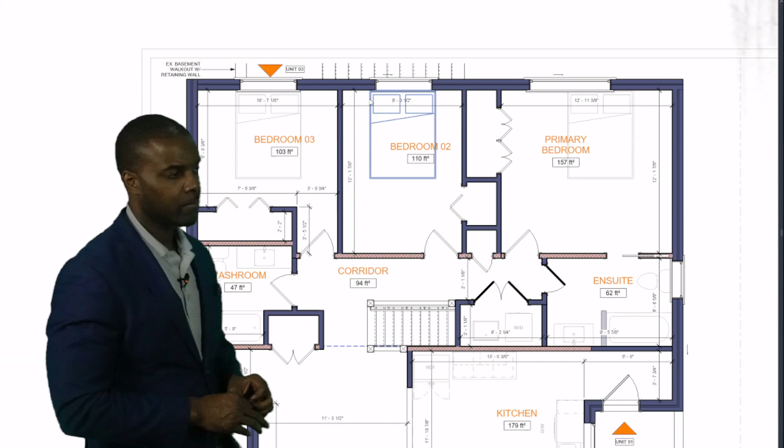Hey Ronald, I have a quick comment, it's like an idea. I really like the idea of the future-proof stuff you're saying, I see my projects the same way. If possible, future-proof it, because you never know where you're going to be, and maybe they don't want to use this house anymore, maybe they want an investment property. One of the things I was mentioning, King, I don't know if you remember, I just want to see what Ronald's ideas are and maybe bounce it off you, see what your thoughts are.

Ronald, what do you think about potentially running rough-ins in between the floor joists or whatever, for a potential future if they ever wanted to make this main floor 2 units? They could break this wall, break that wall, put up one wall, and then have a kitchen and stuff like that, like a bathroom.

But now since we're opening up the walls, maybe we run the rough-ins and cap it off. What are your thoughts? Yeah, that boils down to financial feasibility, the budget allocated for such things, because that will certainly cost.

But that's a really interesting point, because the city of Toronto is right now piloting 6 units in North Scarborough. So by the end of this year, you'll likely have 6 units in Etobicoke too. That's just what's going to happen, so it's not wild to think that adding additional units or preparing for that is worthwhile.

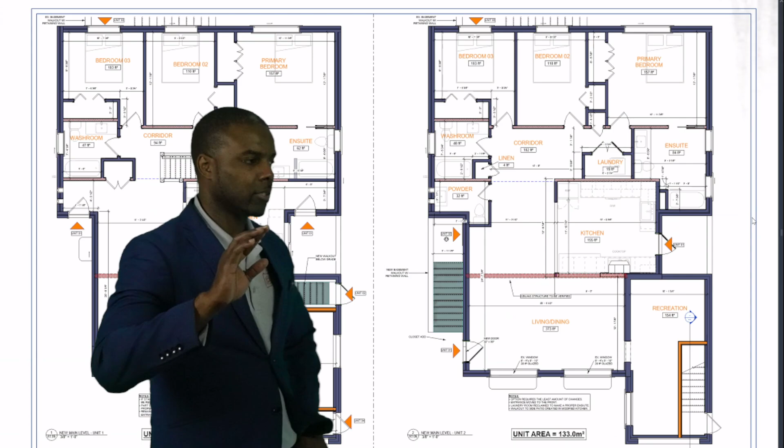Given this isn't a short-term thing, you're probably thinking Mom and Miss Glenda will be here for a while, living there, wanting the comfort of the space. It's a big space to maintain, but they want that comfort. I'd say maintain it like that, but think through the cost of roughing in things like a bathroom, a second kitchen, and so forth, because it might make sense in the future. If you don't do it now, it just means later you'll have to disrupt the tenant in the basement to do that work.

But based on the questionnaire we received and conversations with Tanya, Doc, and King, I think they're going to use the space the way we're preparing it for a while, until they consider another home, and then this can completely become a rental income generating machine.

Tanya and Ms. Glenda, you guys can decide how you'd like us to proceed. We can certainly show you what that could potentially look like.

So yeah, I think at the moment we're gonna continue with the plan as it is right now, because cost is a big factor here too. We just gotta make sure, because it's a great idea what Nathan is saying, but at the same time we need to be cost effective right now and manage whatever is there at this moment. Nathan, we can always explore that a bit more later, so that's not a problem.

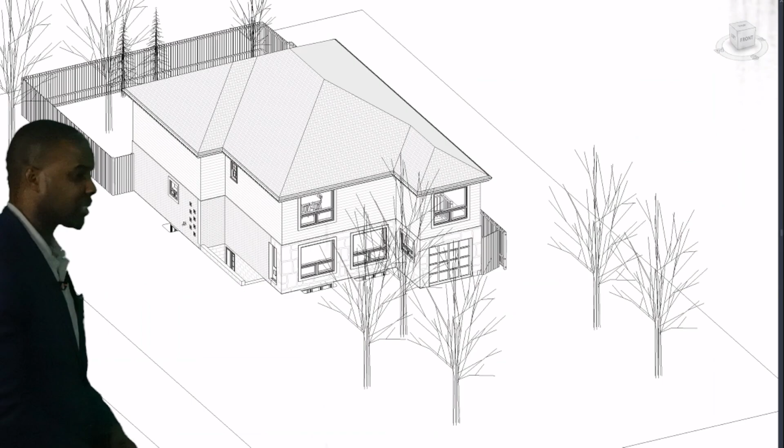Before we look at the options, Jose, could you pull up the 3D model? Could you give me the existing view, and go to shaded so we can see what it looks like — it's easier to see that way. Yeah, so this is it here, this is what we're proposing. Could you go back to the existing?

So this is what exists today, right? And we're going up one story. So this is what the property would look like essentially. And if we were to do this, could you do the optionality so we can see what both options look like from a 3D standpoint?

So in one option, we're proposing that you put a little bit of a deck in the front. It will be a nice touch. The second option would be there's no deck in the front. We're enclosing this, more like a green space almost. It's a lot of natural light. And we can add more glazing in front of this property to balance it off, to create a more aesthetically appealing look. So that's something I just want to highlight here.

Could you just take the roof off the top and give me a slice of the property so we can take a look, give me a dollhouse view, and zoom in so we can take a look at the various spaces. Thank you. All right, great. Let's zoom in a little bit on the spaces so you can see what it looks like. Just go from top and do the swap on the options. Thank you.

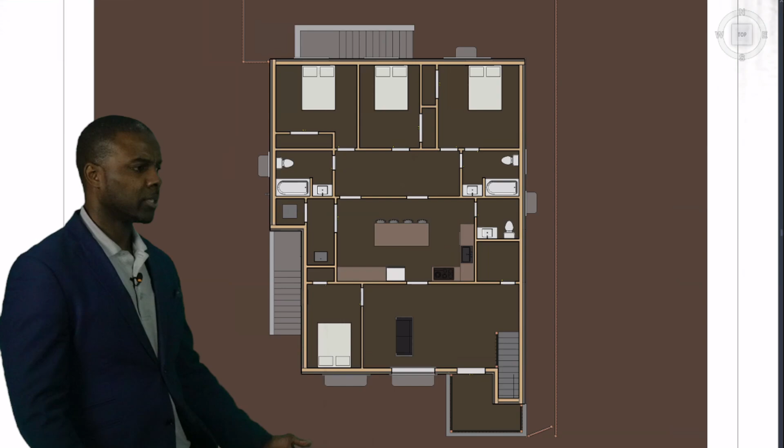So you can see here, this is the option essentially from a top view. This looks a little more graphically easier to understand. Just go back to the other option. You can see one option is like this, the other option is like this. This is the kind of layout that we give. You can flip to the dollhouse kind of view, give us a little axonometric there.

So this is essentially what it looks like. And while we haven't done much 3D, I will say this is actually the first iteration, so we haven't really done much work on the 3D modeling, it's just very basic. But on the next iteration, we are going to get more detail with the 3D renderings, models, and walkthroughs, so we'll spend a lot more time on that. For now, you guys can get a sense of what this looks and feels like.

So let's go back to the floor plans now so we can talk a little bit about them. Again, I just want to point out that the bedrooms are all located at the back. The whole idea here, from a construction standpoint but really from a practical standpoint, is that we try to stack sleeping quarters. We like to say bedroom banks, so bedrooms above bedrooms. We're also trying to stack plumbing, so we try to put bathrooms over bathrooms.

And then we also call those the utility spaces, right, so bathrooms and so forth. And then we also try to stack all of the entertaining spaces, so kitchen, living, dining room. We try to stack all those spaces so they're all just one above each other.

One reason is that it certainly helps with the construction, especially as it relates to the plumbing. Once you stack all your plumbing, it's easier, the plumber just comes and runs all the pipe all the way up. That's great, easy to be done, and they can easily fit into one wall versus multiple walls everywhere around.

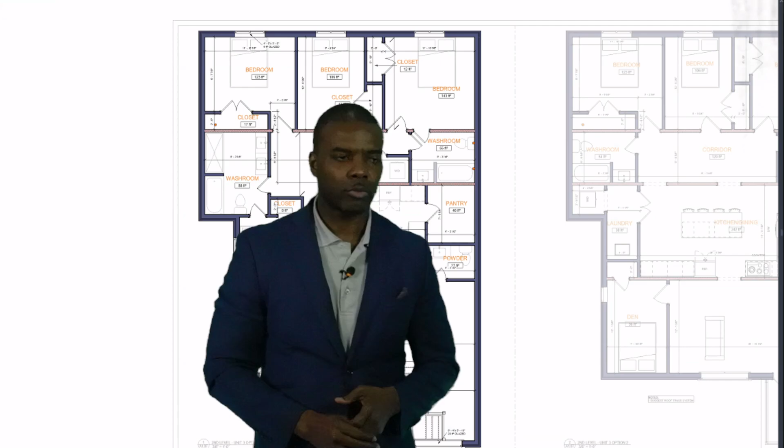But two, it also helps manage the comfort of the occupants on the other levels. So if you're on the second level and the kids like running and jumping around, that's going to disturb Mom and Miss Glenda in the nighttime. So we're not going to put your living room over Miss Glenda's bedroom, right? That can certainly be problematic. So we try to maintain that in general.

So we are going to put all the bedrooms just along the back, very similar to what's on the main floor. There's a reduced likelihood that there's going to be disruption during various hours, right?

So with that said, here, and Jose, I know I actually did some jig here, right? So work with me here. So we made an expansive layout. So the bedrooms are the bedrooms, they all have closets, but I want to talk, maybe let's talk about this first. Let's talk about the primary.

So the primary bedroom has an ensuite. As an ensuite, we also can choose to make this still have a secondary door that still functions as a second washroom. So one kid is in one washroom, the other kid could use the other washroom if mom and dad are not using theirs, without coming into the room. So that's an optionality. You can lock it off, or you didn't even need to have a door there. But so that's going to be the ensuite.

Now King, you can say to us, look, I like this cute little washroom here, but I need more room. I need a washroom that's fit for a king, right? And we can fix that up for you. So this is again, first iteration. Nothing is cast in stone.

We just wanted to make sure you guys can see the ensuite, right? That's the ensuite. Yeah, the ensuite definitely. I mean, that would be, is it if I'm looking at it. Okay, yeah, so it's smaller. That's for sure, it's smaller.

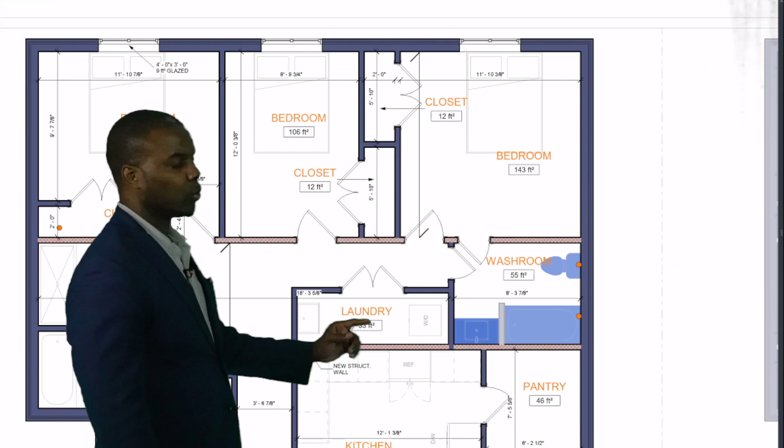So now we're gonna move on over here to this area. We wanted to give the alternate, and you'll see the other option as well. By the way, there's no cost-effective option with this design, it's just two ideal options that have different plays on different areas. But we like to put the laundry area close to the bedroom because that's where laundry usually comes from, bathrooms and bedrooms, right? So that's one of the things we actually did on this option.

I'll just pull this open here so you can actually see that we do have a laundry here. This is an expansive laundry. You can have a laundry tub, or sorry, sink, and you can have a really nice laundry. You can decide to put floor models, you can put stackable, you can probably put a countertop in there to fold clothes and different things like that. So we wanted to make it expansive, but you might say, you know, we actually have a cleaner

that comes in and takes our laundry, so we don't need to have this large room, we just need a small room, right? So you guys can let us know how big you want that to be. What is the functionality you need inside there? Right now I'm simply showing that, and as I said, the two highlighted blue items are the tub and the actual laundry appliance, and then of course we can also add a laundry counter in there, right?

Okay, so those are the three pieces we could put in there. Of course, you can just simply have a laundry closet, it's just a closet that holds the laundry, that's it, right? So this is something you can consider here as well. Of course you can see it is kind of a reduced corridor that leads into this more expansive corridor. Here's where most of the traffic is happening.

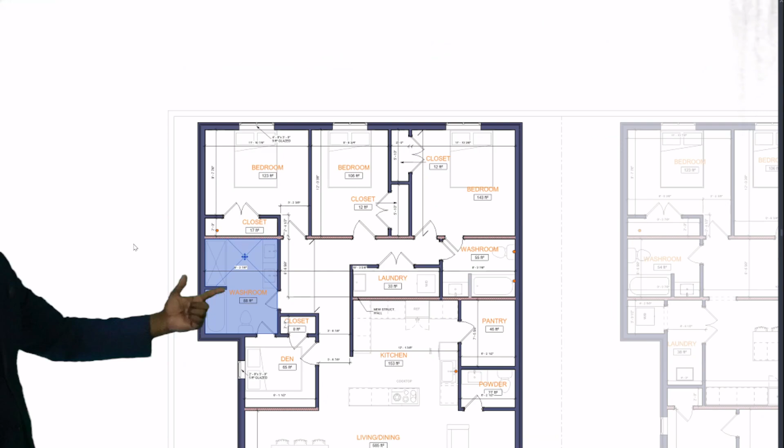And then as you come this way here, you can see that's actually the more expansive bathroom. I wanted to do a bathroom that actually had more elements. Maybe this is a strange thing that probably doesn't really happen in most people's spaces, but we did have a stand-up shower and a tub. We wanted to create something bigger, that's just better. Maybe a big kid is having a shower, but a little kid can be in the tub, right? But again, this is just a space that has more functionality for a larger family, right? Not that you're family planning, but it's a larger, more comfortable washroom.

And also you'll notice there are privileges for this den. This den is actually a little sort of space that is for a friend coming over to spend the night, families traveling, they're stopping by. You guys can have a space where they can feel comfortable and they have access directly into the washroom and so forth, right? That might even be an Airbnb room right there, who knows. So with that said, on the other side of that, you've got your open concept kitchen, living, dining room with an island.

So we just decided to give the optionality. I will say there are pros and cons to having an open space, open concept. Everybody talks about it like, let's get open concept, open concept. Here's the challenge with open concept.

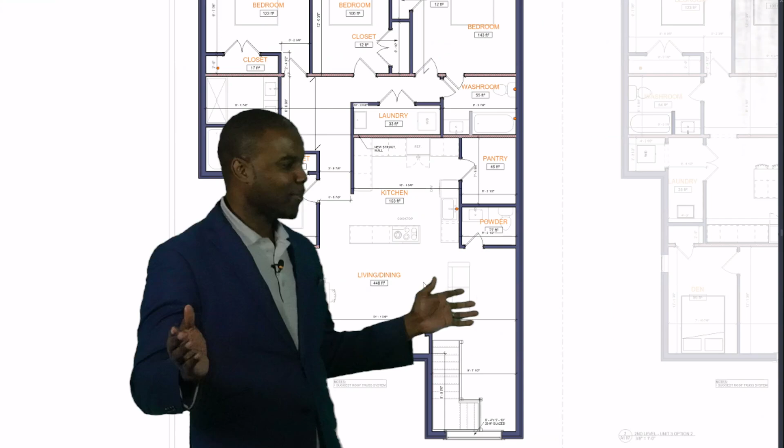One is that when someone opens the door in the winter, the whole place gets cold and filled with cold air. That's one. But also, you know, I love my curry and roti, but I'll tell you, that can smell the whole house up. And if you have this open concept and your exhaust fan isn't working as expected, you can have a problem.

So there's pros and cons to having the open concept. So we did want to give you guys the optionality.

Within the open concept, we did have a nice expansive pantry. In the event tariffs actually come, you can store up enough goods in there to feed the neighborhood for a few days, but your family for weeks. You can buy your stuff and store it in there. Nice, expansive, great storage you can put in there.

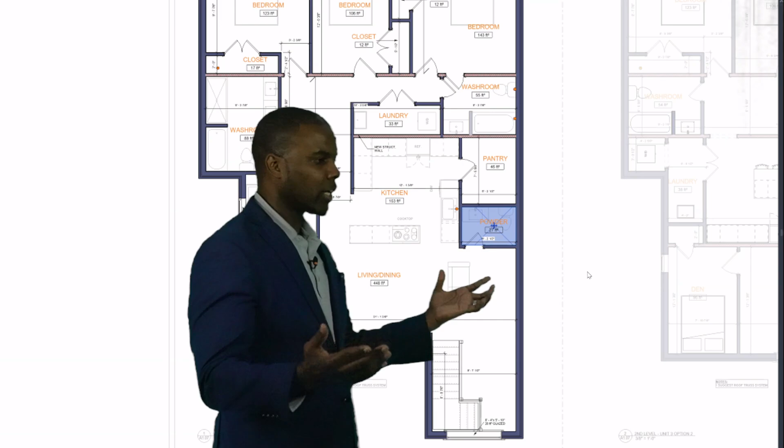I do want to point out here that we also have a powder room right off the actual space. Now, I will say this, there is some privacy consideration - friends come over, someone wants to use the washroom, they may not want to walk across the hall where everyone sees them. That's the point of a powder room, to have something not in your family space, so no one's using the washroom where you have your toothbrush. So we decided to tuck it into the entertaining space because it is an entertaining function.

And then, of course, you've got your staircase here with lots of natural light. This space is going to be really great. Of course, if you guys decide to go with this particular option, once we get to the actual layout piece of things, we're going to do a nice 3D walkthrough and you'll get a really good sense of the feel of the space.

Okay, great. So I mean, there's a lot happening here, but it's a basic floor plan that we configured. I will say this, we have only provided 2 options. I think anyone can imagine there are hundreds of different configurations that could potentially happen. We're just providing 2 that we think are the most optimal, and they all meet building code compliance.

So let's take a look at this option here. Where are we? Okay, yeah, oh, we're missing a wall - I think I removed a wall probably. Are we on the main floor level? Okay, good, this is the second floor. Second floor, we got the bedrooms again up top with a very similar ensuite, so all the 3 bedrooms, primary bedroom is equipped with an ensuite.

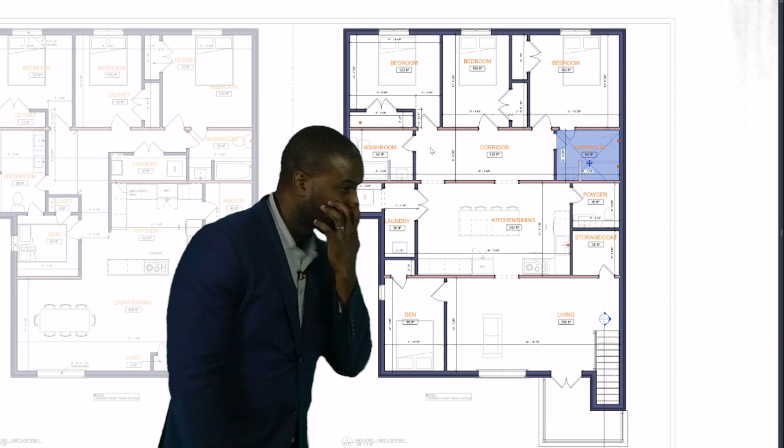In this option here, we deliberately tried to - sorry Jose, I think I removed a wall for the kitchen. I don't know, maybe is that what I did? No, I didn't actually. No, not this one. Okay, got you. This one, yep. Okay, awesome. Yeah, sorry guys, I was fiddling around with this, and that's why.

But anyway, with that said, you can see in the back here, there's just a slightly larger kind of corridor back here.

Is it necessary? Not really, but sometimes having cramped up spaces is something you can live with for a while, then you say, why didn't we just make this larger? Every time you're walking through the hallway, you're bumping into everyone. It doesn't feel fit for a king. So this hallway is definitely fit for a king, in fact it's fit for a gym, you could put workout gear in here. It's large, it's big, so this is a much more comfortable space for circulation.

And then of course, this is really nice, I like this, but you guys may or may not. You may say let's swap these spaces out. What we've done here is basically the dining room and kitchen area, kind of in the middle of the home, is the heart of the home. But you may say let's put the dining room down here and the TV room up here. It's really optional, but what we're trying to do is separate the entertaining, since this is where people will be watching TV, hanging out, joking around. Or you might say no, we're going to prepare meals and watch TV in this area, so it just depends how you want to do it.

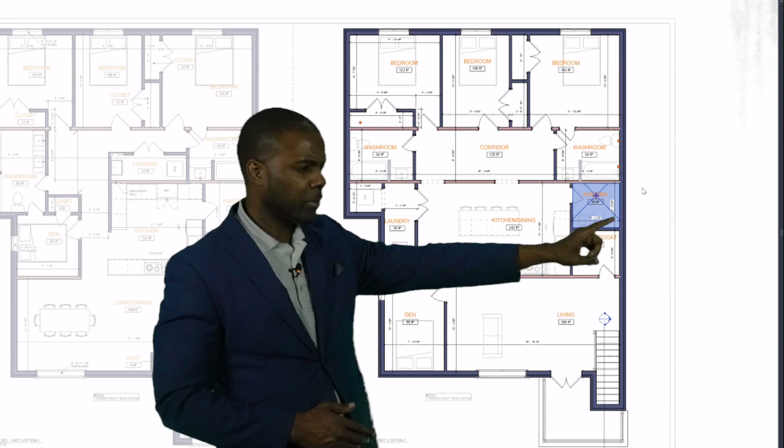We do have on this side of the kitchen... could you give me that room there, Jose? The powder room, yep, that's the powder room up top there. And this here is just some coat storage, so when you come in and come up the stairs, coat storage is right above to hang the coats and stuff like that.

And then on this side here, you have... sorry, I'm not seeing this, Jose. This we have laundry, a washroom and laundry room. We have the washroom, and then that's the laundry, so it's a large laundry, very large and expansive. You can definitely have significantly more stuff happening inside there.

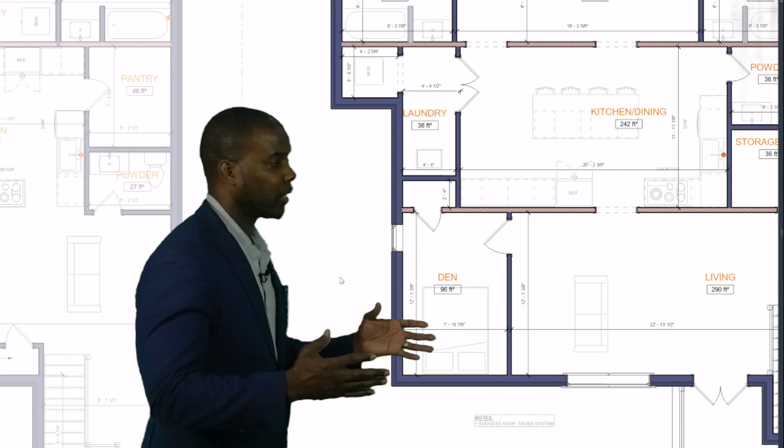And then we still included a den to the front of the property. You can use that den as an office, and you can probably have a futon in there that pulls up, or different things that can be rolled out as a bed if a friend came over to stay, so it can be used for different things.

And then of course you have the open concept area here, and the stair configuration changed and modified to allow for a front outdoor area, because we wanted to give this as an option simply because you guys will not have an outdoor access without this. So maybe this might actually play really well for you guys.

So this is the second option for the main floor level. Again, there's a lot of similarities, but there's also some differences, and we wanted to point those out.

Maybe I'll say this before I close out and answer questions: you guys can choose between any option. There's nothing saying you can't mix. You could say you like the configuration of the living room in option 1 for the second floor, but don't like the location of the washroom in option 1, so use option 2 for the powder room. You can make those comments and we will integrate that into a final layout suitable for what you want to do.

And of course you can add as much commentary as you like, and we will integrate it and complete a final layout for you, or at least the final draft layout, and then complete it with 3D walkthroughs and imagery so you can have a better view of what the space will look like, giving you a much more volumetric experience so you can see how the space may potentially feel.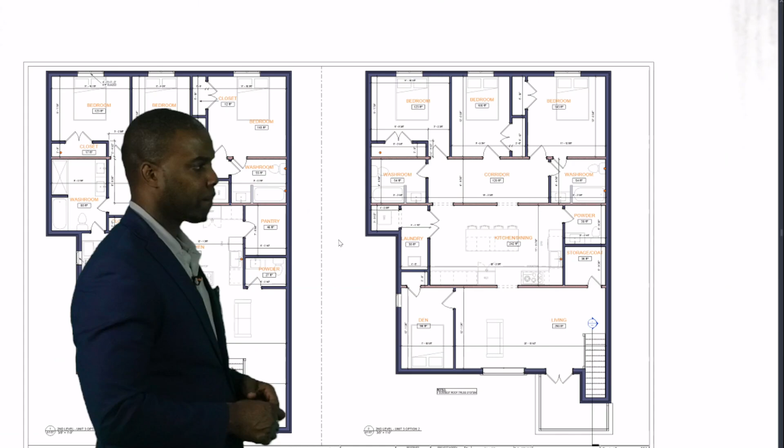And this is more directed, I guess, to the Darkos, sort of. Oh, sorry, but who's speaking? It's Gabe. Oh, Gabe, yeah, is on the call. All right, I was like, whoa, who's this?

Yeah, so my question is, since obviously we're gonna be adding the new level, I was wondering about the Darkos - I don't see it here in the plans because we're in bird's eye view and looking at square footage, but I was wondering if they're gonna take the opportunity to increase their main floor level to either a 9-foot or a 10-foot, and if they're going to do that for the second floor addition too. I just wanted to ask that question and throw it out there.

Yeah, that's a good question. I'll take a first stab at that there, King. So I would suggest that the main floor remain at its current height - we just simply beef up the structure to accommodate the new floor above. However, the second story, the whole idea, because this is new, the only limitation we have is in height, not really quite a limitation, so we can certainly go up.

So Jose, what's the maximum height? Is it 11 meters, like about 39 feet or so? 9.5 meters. Okay, so 9.5 meters. How much does that work out to in feet? That's about... so that's almost about 40 feet, right? What do we have there?

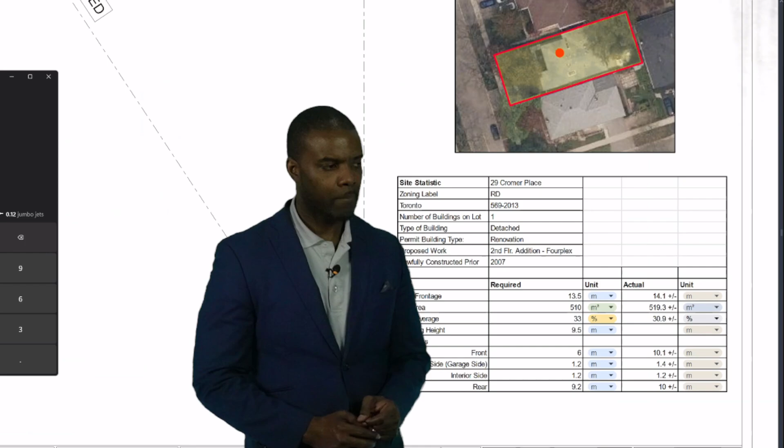So with that said, we will double check that, Gabe. But to answer your question, the second floor we probably can go to maybe slightly more expansive. You're building new, you can easily get 10-foot studs, 10-foot drywall, and make a 10-foot ceiling, which is just an easier modification versus trying to tweak the main floor, which is like now adding this sort of ladder and building it up an extra foot. I think that's going to be problematic.

But again, if that's something King wants, absolutely. But with that said, I think I agree with you - that's a good point, Jose. You should make a note of that. Let's make a very deliberate point here of potentially making the second floor maybe 10 feet versus 8 feet. It costs more, but it will be a space that just feels significantly better experientially.

Sorry, King, I think you're muted. Yeah, sorry guys. Were you saying you want to extend the second floor a little up? That's what I'm getting.

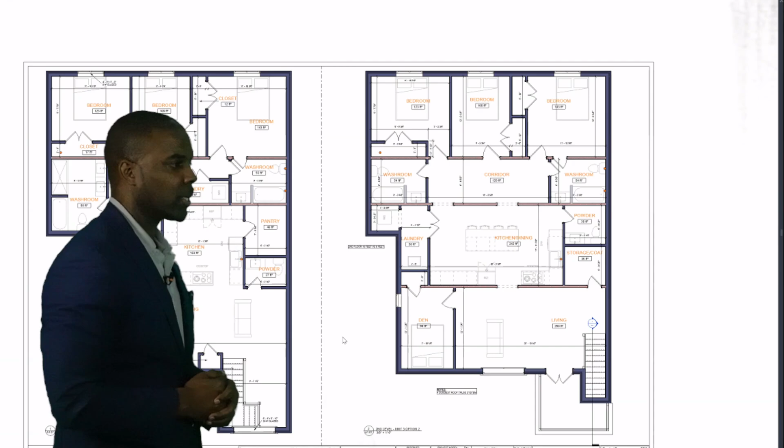The height? Was that what we're talking about? Yes, so that's what Gabe mentioned - he was asking if that's something you guys are considering. And what I'm suggesting is that's a great consideration, but extremely nuanced, right? It's not like - they'd essentially have to create a short wall. Let's say your existing wall is 8 feet, they'd have to essentially frame out a short wall that's 2 feet and put it on top of that wall.

I don't think it's a great use of funds, with the exception of if you say, look man, we love high ceilings. Like my auntie, she's a tall lady - she's growing, she's a growing lady.

But yeah, I'll say keep the main floor, and the second floor definitely consider going up an extra couple inches, maybe 9 feet, 10 feet, especially if we can meet the headroom, the height requirement from a zoning standpoint, and that way we can actually add more. It just feels better - I think the space will feel better for sure with a higher ceiling. So that's a really good point you brought up, Gabe.

Yeah, the second floor, that one we can just make it high. But I feel like the main floor, the height is good enough for now, for sure. They look like it's a great height on that side. Yeah, I think it's good.

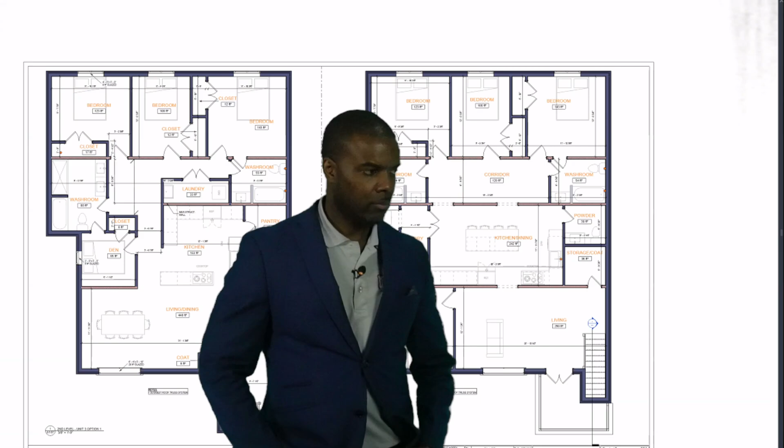So the second floor - and what about the basement? I know it has a height, you guys came here and did all the measurements, has a height for everything. Yeah, the heights are good. All right, okay, I guess the main - Jose, could you pull the height up? I don't know, you didn't tell me anything about the heights, Jose. Yeah, one moment please.

While Jose is pulling that up, I'll mention there have been some recent changes to the building code. We were previously operating under the 2012 building code with a series of amendments, but then they revisited and revised the Ontario Building Code to harmonize with the National Building Code, the NBC. So now there's some harmonization, which actually creates more flexibility from a code standpoint. I'm still reviewing that to see how it impacts all the projects we're doing this year, because it came into effect on January 1st, 2025.

Headroom clearance is very important, but I'll do a much deeper dive once we get to the permitting piece of this. Why don't you give me the height requirement there, Jose?

The headroom clearance? Yeah, we have 8'1" on the main floor, 8 foot on the second floor, 7 foot 2 on the basement. You need 6 foot 10 3/4 or 6 foot 11 for a minimum height in the basement. So your basement does meet the headroom clearance—no need to do any underpinning work or anything like that.

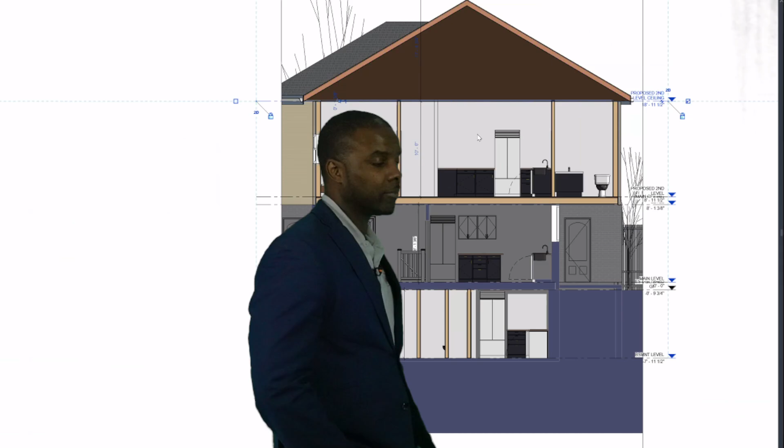What Gabe is suggesting—well, he wasn't suggesting this, he was just asking if this is something you want—is that the main floor remains the same, but the second floor will go up. We'll just verify that it complies with the maximum height to the roof ridge from a zoning standpoint.

Ronald, quick question while we're here: what do you think about the flat roof?

Oh man, those are difficult to maintain. First thing, you'll have to get certified installers—they're expensive. The roof is going to cost more as a system to install. I know it might sound counterproductive, but it costs more depending on if you're doing, what's it called, not EPDM—anyway, there's this membrane you can stick down. That's one, but there's another membrane where you have to actually fire it with tar and stuff like that, sort of bitumen.

With that said, I worked in the commercial space—my last tenure before I started my business was with Scotiabank as their project manager in real estate, managing all their buildings and making sure they were ready for sale. If I were to tell you the one thing I hired numerous contractors for, in fact the job I had to do most—before every single building was sold, we had to repair the roofs, and most of them were flat roofs.

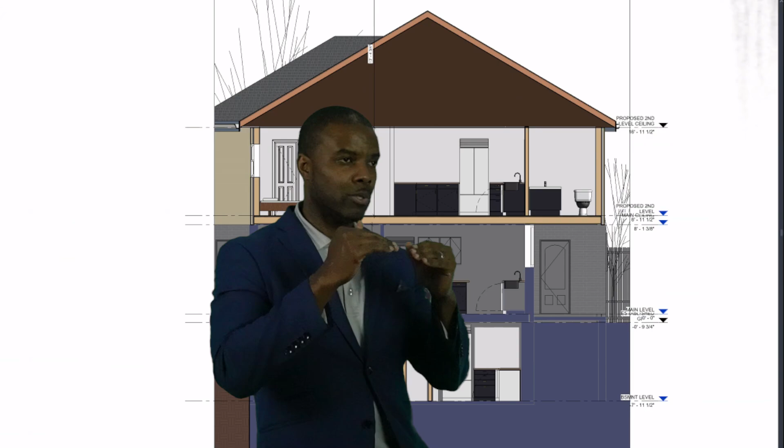Those roofs, if not installed properly—there are many different systems you can use. You can use gravel on top, bitumen, sloped rigid board insulation, you can slope the joists. There's many different ways to do it, but it doesn't matter which way—that membrane is a weak point because it's directly exposed to the climate: hot, cold, hot, cold. It's a lot of maintenance, and if not installed properly, you'll have areas where water is gathering. Is your rainwater leaders and drainage properly sloped? It's just so much consideration.

For a homeowner, I wouldn't recommend it—it's too expensive a system to maintain. Whereas with a sloped roof, you put your shingles on and get your 25-year warranty. With this flat roof system, you'll have to maintain it every year to make sure everything is good—maybe not every year, but much more significantly, right? So I wouldn't recommend it for your residence here. All right, thank you, that's good.

Yeah, awesome. By the way, Nathan, what are your thoughts on that—flat roofs?

I have a property that has a flat roof, and it is a headache. The house that I have, an investment property, starts to sag over time. It can be done properly, but if for some reason it's not done properly, that issue is something you will face, because over time you have snow falling in our climate, it piles up, and things slowly start to sag, and then that's when you run into issues.

Unless you were thinking of doing a rooftop thing, like a little patio up there, I would suggest it, but if not, then... there was a thought about doing something like that, but I don't know yet. If I'm not mistaken, I'm pretty sure I saw in one of Ronald's things, I think it's option 2 on the right.

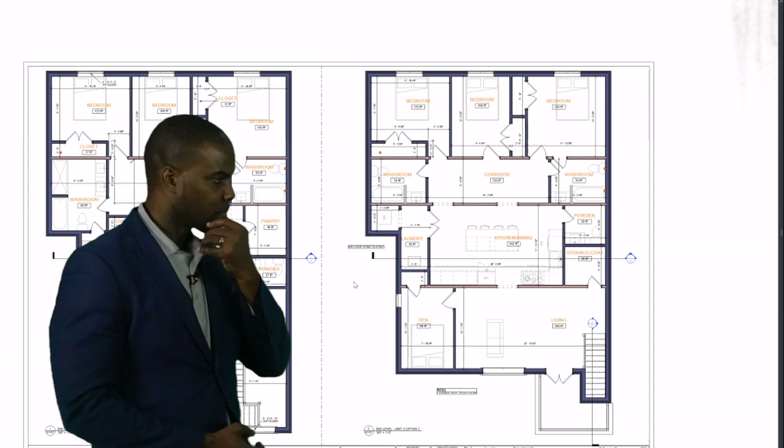There's like a balcony there, right, Ronald? Yeah, there's a balcony above the garage. Which might give you the same thing that you were looking for, King. Yeah, it's okay, I think we should definitely be okay with that.

So to Nathan's point, that will have to be a sort of a sleeper system. So that'll essentially be a flat roof that you're building a deck on. So we have to do some sleepers, make sure it's ventilated, make sure it's waterproof. There's a little more maintenance there, but we can manage this. Don't have to do much to manage this.

However, the entire flat roof, it's a big job. Certified installers are expensive, there's insurance, there's a lot of things that can go wrong with that. So I agree, it's a roof that lasts long, but the maintenance, I don't know how the payback is on that, but they last long if you maintain them frequently. But you pay a lot for it upfront too.

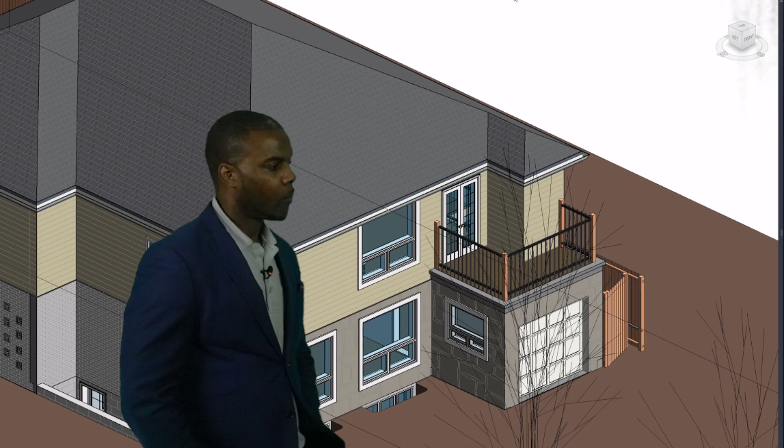Okay, now the main second floor, if you go back to the drawing that you have, I like the option one that has the big open concept. But I feel like this one looks a little closer - the second option is a little closer with a corridor, right?

Why don't you pull the 3D, Jose? Give the doll house view on this, just for the visualization, it's slightly easier. Just give him a quick second here, King.

No worries. So you understand how to use this, right? Nothing is cast in stone. We're simply ideating here and giving you ideas. So absolutely, you have the option of just saying, I like the open concept on option one, but I really like the den location in option two, and we'll combine them both, right? So that's where your input comes in.

Like I said, we're the chauffeur, but I can tell you there's a bumpy road ahead, we can get there faster, and you can say, you know what? Nope, wife is pregnant, not going up that road, let's go a different way, right? And we will take you that way then.

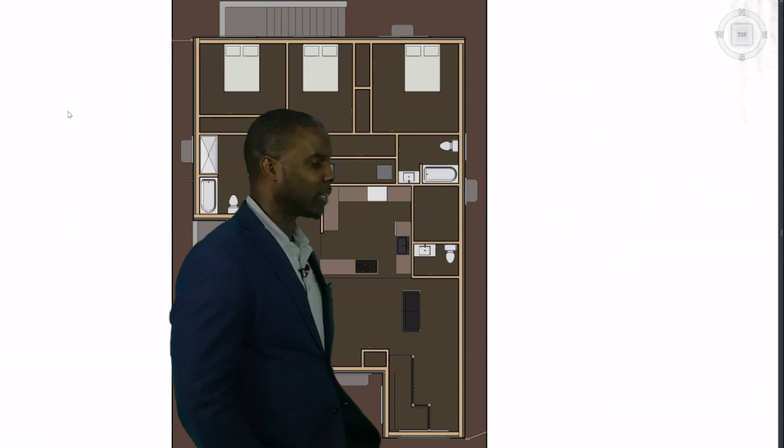So, okay, so let's say... yes, so this is the option here. You're gonna give a slight tilt to this, Jose, so we can look at the axonometric view. Just so you can see what that looks like there. So to your point, yes, this is more of an open scenario here, right?

Obviously, I think with the whole kitchen layout, there's a lot to be discussed concerning that. But with that said, it's definitely one of those things that could be a thing, and this is the other option, right? That option looks closed, right? It looks like it's a closed kitchen kind of thing.

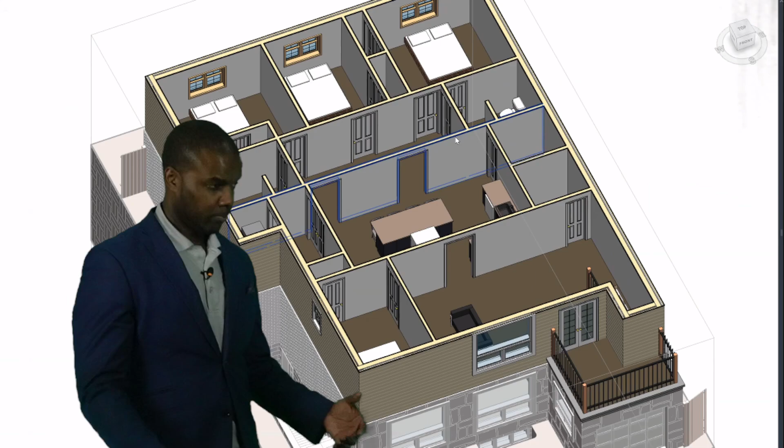And again, I want to point out the pros and cons of that. You can decide which way you like - the modern way of doing a kitchen is open. However, as I said, it just depends on how your family utilizes the kitchen. If you guys do lots of cooking but not so much entertaining, more formal dinners, probably having something like this might work. But again, the modern way is doing it with an open concept - the wife is an entertainer, she loves those stuff.

Anyway, so yeah, I think everything looked great so far. There's still more to go on to look at stuff like that, but so far so good. Okay, wonderful, wonderful.

Okay, well, we will tweak this based on some of the comments. Here's what I'll say. First thing first, the drawings that we have right now, we're actually going to send all these drawings to yourself, Darkos, right? We're going to send this to you guys, and we're also going to send this to Nathan.

As I mentioned, you guys will have a 3D model that you'll be able to manipulate. I'll prepare a small video that gives basic instructions on how to use the viewer and the tools. For you, Nathan particularly, you'll have the ability to select all the windows, select all the doors, go through the structure, slice the building up, and look at different aspects. So that's what this will provide for you, so that you guys can actually have that.

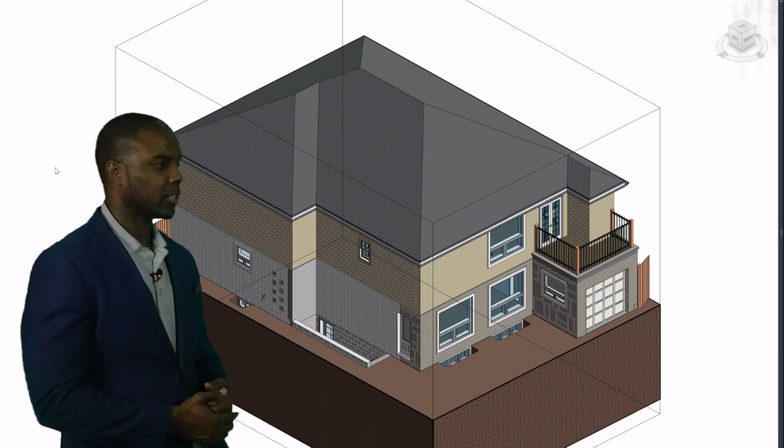But for you, King, maybe you guys don't really care that much, but you care that your team has access to this stuff, but we'll still share that with you, okay? That's the most important thing - have access to it, and at least we can all be on the same page at the same time. That's right. Okay, good. That's wonderful, wonderful.

While we're talking about that, I just want to make sure the second floor - nothing's set in stone yet, as you said - the ensuite washroom, that one we can just do something about it to extend it more. That'd be great. Okay, good. That's going to be an important one there.

Okay, Jose? Yeah. Okay, all right, great. This is good stuff, man. So by the way, was this call valuable or what? Let me hear you guys. I want to hear the feedback - was this call valuable? Did you guys really get a sense of what we did from a design standpoint?

Yeah, it's very new to me, right? So it's very interesting and it's very good. It's giving more understanding about what is going on instead of just hearing about it. Right now you're looking at it, what you're facing and stuff like that. So it's very good. It's very good to me right now.

Oh, fantastic, fantastic. Okay, great. I really appreciate that there, King. With that said, we're going to wrap it up here. Nathan, you had any final comments? Gabe, you had any final comments before we wrap it up here?

I just cut out right. Go ahead. No, I just cut out at the end there, so I missed what King said. You said something, and then it just cut out because my Wi-Fi died. Oh, jeez. No, he was just saying the presentation was clear. Now he has an understanding of what it is he's getting.

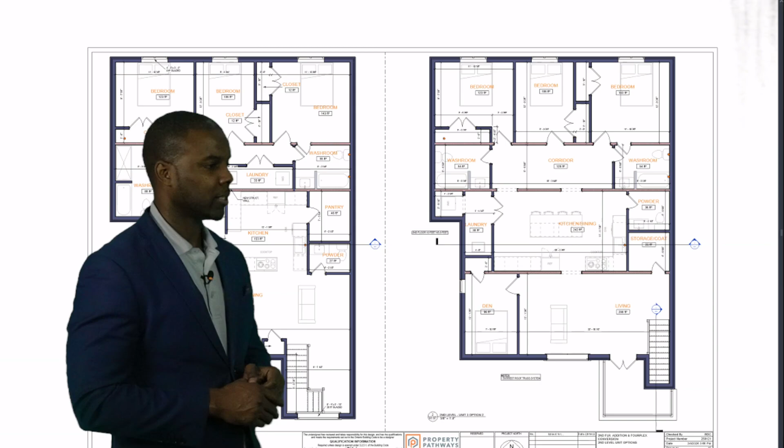Nathan, Gabe, if you guys have any questions, need further clarification, so you can start prepping. I mean, I would say that probably now is not the time to necessarily jump in because the final option isn't really selected, but at least you guys can start mulling over what's the potential here. I wouldn't dive too deep into quantity surveys because there's still a lot to be done here from a building code standpoint and finalizing the design.